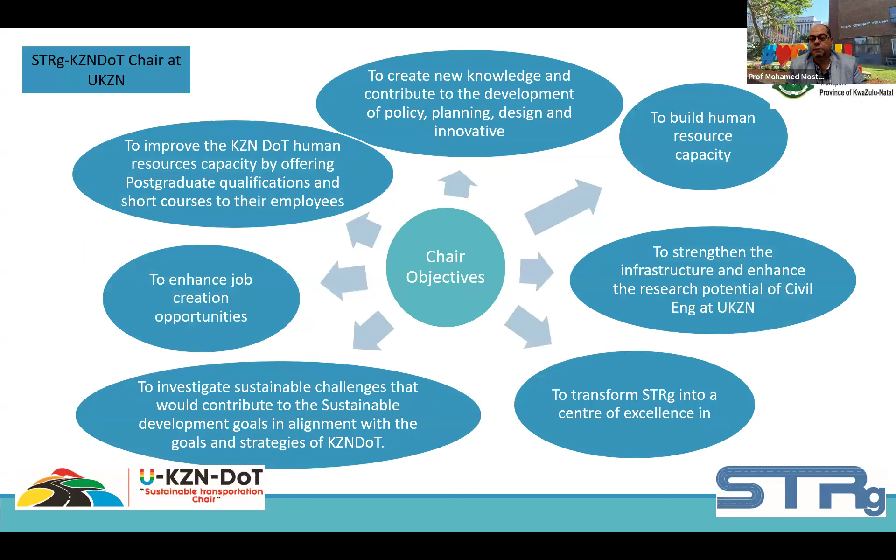I'll quickly answer the question - why are we interested in smart and sustainability at the same time - before presenting our speakers. A warm welcome again from myself as STRg group leader and Chair in Sustainable Transportation at UKZN. Our chair has many objectives, part of which is to share knowledge. Our activity today is to share knowledge with you, knowledge not particularly developed by our research group, but as you will see, developed by scholars around the world. We will all benefit from this, which will help build human resource capacity, especially in the KZN area. Our group is interested in many areas of sustainable transportation research, especially climate change, gravel roads, sustainable road materials, smart transportation, road safety, and so on. We are running research related to most of what you will hear today, which is one reason for sharing this webinar - it's also for us to gain more knowledge which we can integrate into our research portfolio.

For 2024, our research chair is focusing on 4 different projects. The first is improvement of gravel roads. The second is advancing resilient transportation for climate change mitigation. Third is maintenance and pavement management systems. And the last one is public transportation. However, we revisit these areas on an annual basis, and based on that, we also offer opportunities for bursaries and postdoc research.

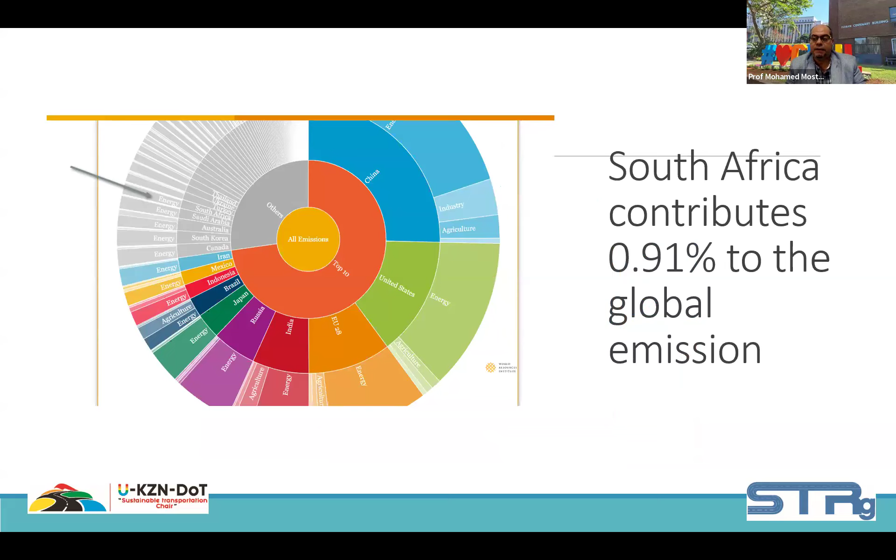So why smart and why sustainable? The sustainability development goals are very important for all of us, and from our transportation area, we can think of goal number 9 and number 11 as our targets to achieve. There is a huge interest in sustainability, and we are not excluded from this interest. South Africa produces around 1% of global emissions, and considering the size of the country, this is a significant amount. Our transport sector used about 50% of the energy in the country as of 2021. I can only assume this figure went up significantly after the developments happening in the N2 and N3 in the region recently, so we are producing a lot of emissions and contributing to climate change, not only in the country but globally.

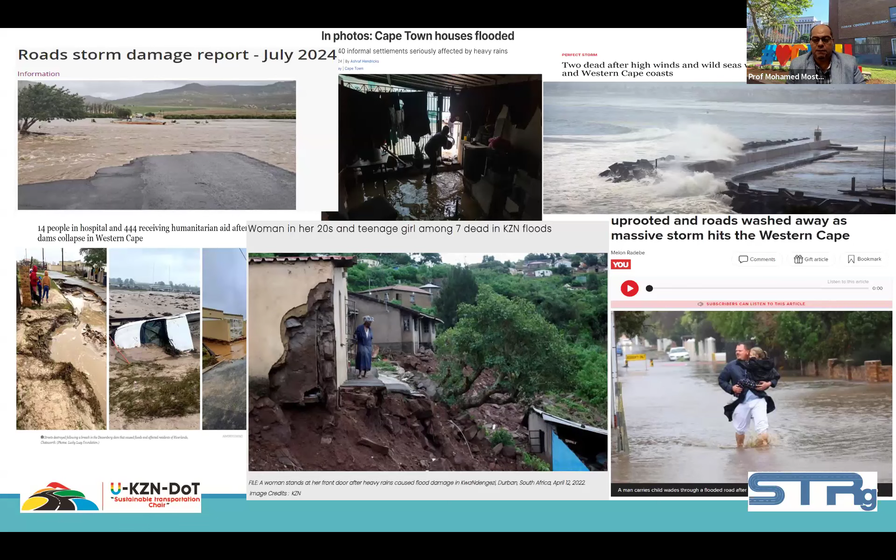Over the last few years in South Africa, in the Western Cape and in Durban, there has been a lot of floods and drought at the same time in different areas. Climate change became a challenge, and it is a challenge for sustainability. So there is a need to mitigate climate change conditions and look at smart solutions, and sustainable solutions became very important. We need sustainable roads, but we also have less budget, so the solution is to look at smart solutions.

So today we will hear from our guest speakers what is their own understanding of smart, because smart is not just technology. It's about other things which our guests will talk about. And of course, they will have a good link between smart and sustainability in so many areas related to transportation.

Let me stop sharing. So, Prof. Das, can you please share your presentation? Thank you, Mohammed. Can you hear me? Yes. Let me share my screen. Okay, great. Good afternoon, everyone. Thank you, Mohammed. Full screen mode, please. How do I go to full screen? Not in full screen. Is it not the full screen? No, not. Okay, click the full screen button and then go to display settings. Yeah, I went to the full screen button, slideshow. It's showing me this, I just try to pop up and then it goes back to normal view. Okay, now go to display settings at the top. No, display settings, not this one. Next one, this one, yeah. The duplicate, so swap presenter view and slideshow. Yeah, duplicate I think. Okay, yes, you are good to go.

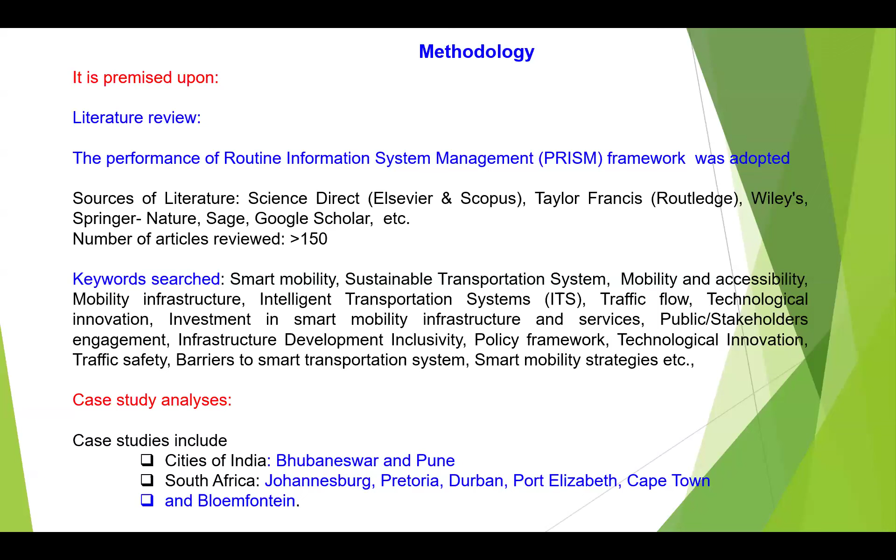So 2 of the Indian cities are, if you look at this, one is on the eastern coast and another is on the western coast. We took these 2 cities because of my acquaintance, and we have already done work there, so it's easy to get some data. That's why we consider these 2 cities, and these two cities are highly growing cities as well as having severe transportation related problems, and they are also in the forefront of making the city smart.

They are 2 of the smart cities in India, recognized smart cities in India, and they have a quite good transportation system or emerging transportation system.

Similarly, on the other hand, in South Africa, we have considered major cities such as Cape Town, Port Elizabeth, then Bloemfontein at the center, Johannesburg and Pretoria in the north, also Durban in the east. So these are the cities we considered as our case studies to understand how smart transportation system is working there.

So to understand smart mobility, we need to understand that it entails using the logistics and smart systems that are associated with transport to improve the traffic flow and mobility of the inhabitants. In other words, it's the accessibility, local or international accessibility enabled by seamless physical transportation using advanced digital technology, including ICT and integrated ITS. So the goal of smart transportation is to reduce pollution, first air and noise pollution, then reduce the traffic congestion and improve people's safety as well as improve travel speed and decrease travel cost.

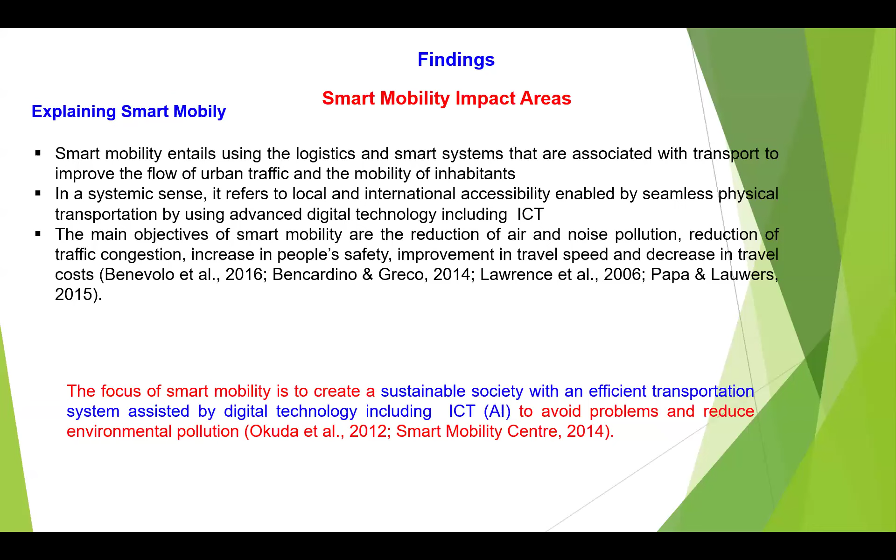So this is the main aim of smart transportation. And in other words, it will create a smart and sustainable city, or contribute to the creation of a smart and sustainable city, by using digital technology, including ICT and artificial intelligence.

So while understanding smart mobility, smart mobility has 6 elements. One is smart infrastructure, smart mobility modes, connectivity and robotics, data and traffic management, personalized services, and logistics. And this leads to efficient transport traffic flow, real-time information and decision-making, affordable transportation, enhanced traffic safety, reduced environmental stress, and inclusivity and equity.

So while there are 5 elements or 5 areas which are highly technical, there is one area, inclusivity and equity, that is also a part of smart mobility, which is the most challenging part in smart transportation.

While evaluating the smart mobility impact areas in case study cities, we have a matrix here of smart mobility impact areas and smart mobility elements, with different cities - Johannesburg and Pretoria have been taken as one region. So there are 5 city regions in South Africa and then 2 cities in India. On the left side, we have our smart mobility impact areas leading to smart mobility elements.

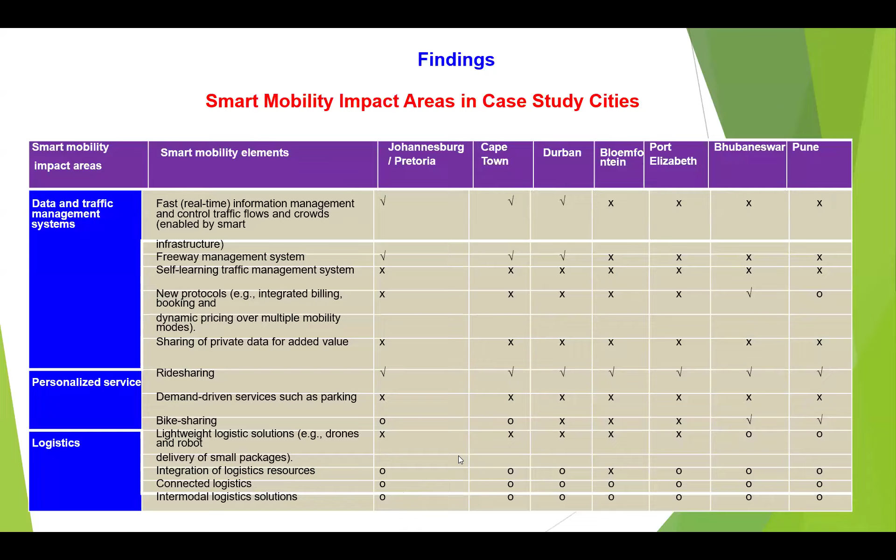So in other words, we find that under smart infrastructure, most of the cities lack smart infrastructure, except smart travel lanes in some of the cities, and energy efficient solutions are not available.

BRT and IRPTN are available in some cities such as Johannesburg, Pretoria, and Cape Town, but present in Durban only to a certain extent. It's not present in Bloemfontein, but in India they are available. Autonomous driving and vehicle-to-vehicle connections are not available in any of these cities. However, GPS is available. So certain elements are available in certain places.

For example, Johannesburg has smart travel lanes, redesigned dedicated areas, BRT and IRPTN, real-time information management, and a freeway management system. This is quite significant and available in South Africa. In Cape Town, similar things are available. In Durban, except BRT or IRPTN, all others are available. But in Bloemfontein you find only ride sharing is available, and so in Port Elizabeth.

In Bhubaneswar and Pune, we have designated, dedicated areas available, BRT is available. New protocols and an integrated billing system are available in Bhubaneswar as part of smart transportation there, but not available in Pune. Ride sharing is available in both cities, and bike sharing is also available in both cities.

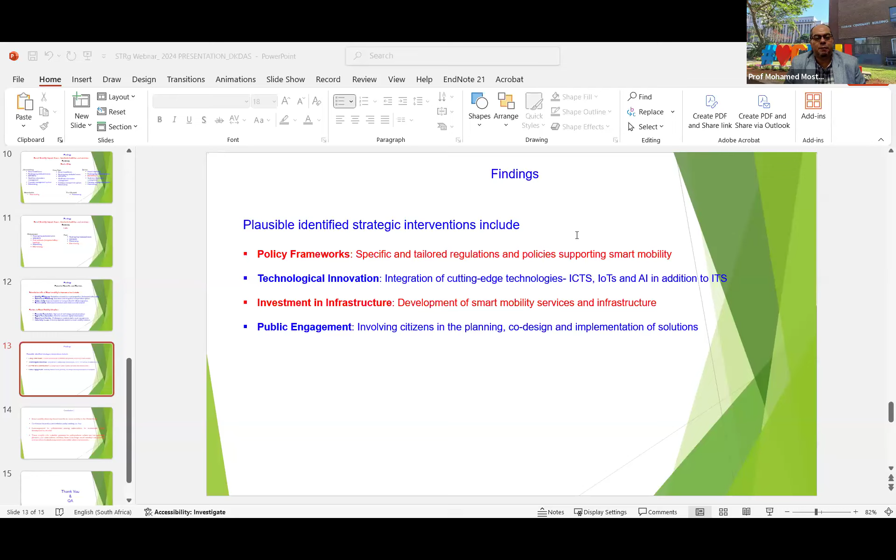No, rail transportation is part of the whole smart transportation process. There is another area in smart transportation called logistics. In logistics, you need to be intermodal, we need intermodal logistic solutions, and rail is part of that intermodal logistic solution. We need to have a balanced freight movement system.

Currently, as Ronald rightly says, the majority of freight moves through road, that's why there is heavy traffic on the roads. So if you move some of the freight traffic to rail, perhaps traffic congestion would be reduced, and that would make the system smarter and more sustainable than not.

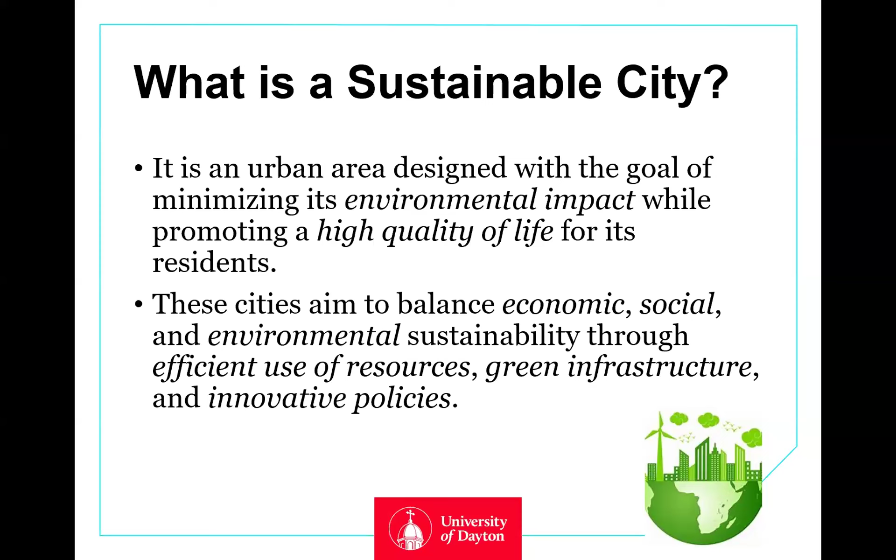So we have 5 key characteristics when we talk about sustainable cities. We look at environmental sustainability, then efficient transportation - that's where smart transportation comes in, and also sustainable transportation.

We are looking at resilient and smart infrastructure - remember, transportation is part of the infrastructure. Also social equity and inclusion, where we make sure everyone in the city, everyone in urban areas, is included. No one is left behind in this society; everyone is involved and everyone is taken care of. And lastly, economic sustainability. So those are the 5 key characteristics of a sustainable city.

So for us, we are more on the transportation side, therefore I'm going to go into that. What are urban mobility innovations? There are several that have been going on over the world. Some are in different stages - some have already started, some are still in development, some are in between.

Urban mobility innovations are essential for creating sustainable cities. It's like you have a human being, a body of the sustainable city, and then you have parts of it, like different parts of the body. Transportation is one part of the system, and this system should be efficient, environmentally friendly, and accessible to all - so talking about equity and inclusion.

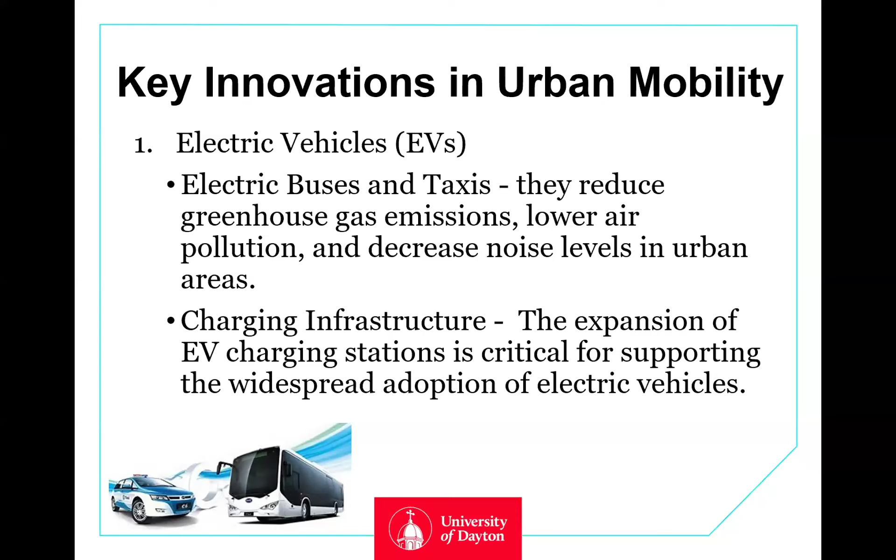Also, we talk about micromobility solutions, which are also electric vehicles. So you have e-scooters and e-bikes, can be shared, electric scooters and bicycles, which offer convenient low-emission transportation options for short trips. That's what we call shared, you can just use them as you need. These services are often integrated with public transit, reducing reliance on cars for last-mile connectivity. We call this the first mile and the last mile.

Also, number 2, we talk about micro-mobility solutions. Now these ones are not electric. These are human-powered bicycles, but sharing bicycles. You don't need to own those bicycles, you can share, use it as you need. So cities are investing in bike sharing systems to encourage cycling as a sustainable and healthy mode of transportation, which in the US are still struggling with. I know Europe is a big thing, they have been in an advanced situation here, but in the US they are still struggling, trying to make this more available and acceptable to most people. So these programs often include docking stations at strategic locations throughout the city, convenient for everyone to access them.

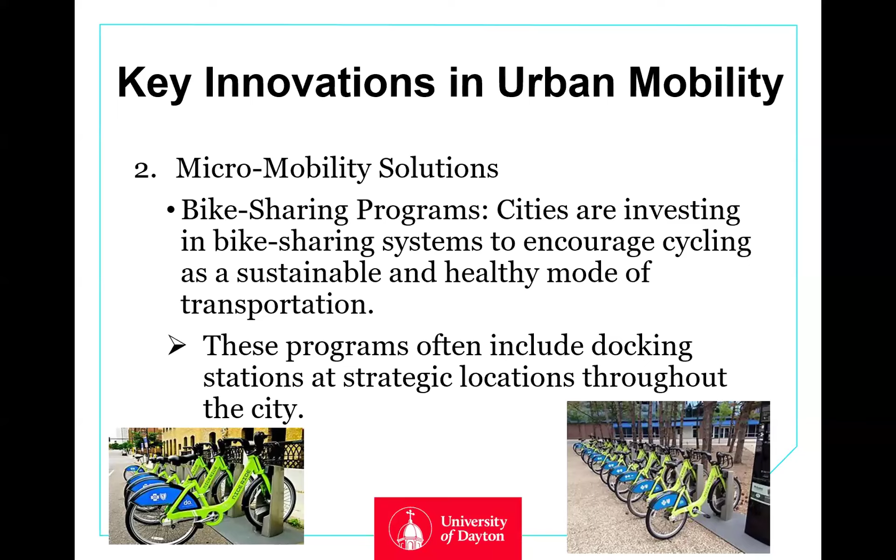The third one is about public transit innovations. Bus rapid transit, BRT. Everyone knows about this. These are systems that offer high capacity, efficient bus services with dedicated lanes, reducing travel times and improving reliability. So we look at this as a way of reducing cars on the roadways and congestion. BRT is a cost-effective alternative to rail systems, particularly in developing cities.

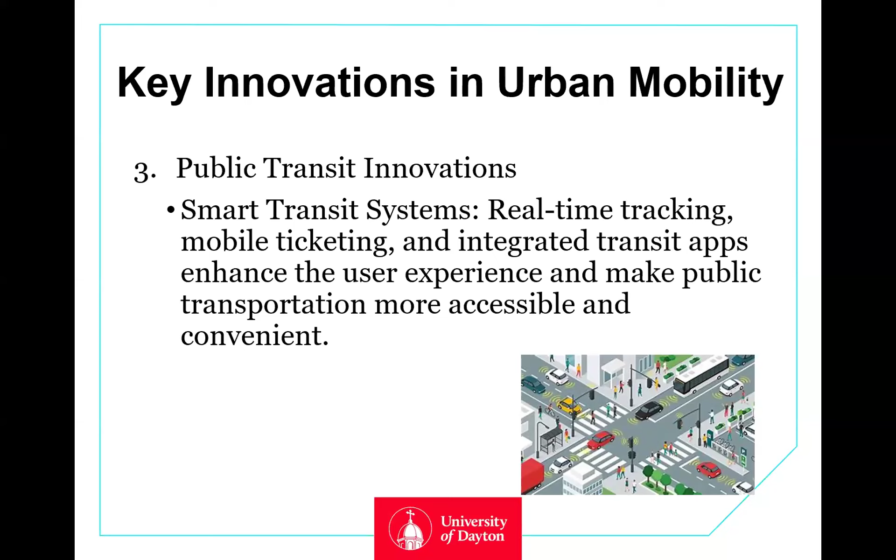Also, we have smart transit systems on the public transit innovation side. They include real-time tracking, mobile ticketing, and integrated transit apps, enhance the user experience makes public transportation more accessible and convenient. So therefore you can easily get a ticket. You don't have to go to the transit station, standing in line trying to get tickets. You can have your ticket in your app, on your phone, so you can just make it easier to go in and out from the bus.

And then you have autonomous vehicles. Here we're not talking about cars and individual cars, we're talking about shared transit autonomous vehicles, which are driving on their own. So we have shared autonomous shuttles. Autonomous shuttles are being tested in many cities, the solution for last mile connectivity around the world. Many countries are interested in this type of vehicle. These electric self-driving vehicles can operate on fixed routes, reducing the need for personal car ownership.

Also, we have AVs in freight and logistics. This is an area which is still not much developed, but testing is going on all over different places. AVs in freight logistics: autonomous delivery vehicles and drones can optimize urban logistics, reducing congestion and emissions associated with goods transport. So you don't really need to have a driver bring your delivery at home. This is probably the future where we're heading.

Also, number 5, mobility as a service, MaaS, which is big in Europe. Also in the US we have this coming in, and probably we use a different terminology, MOD, mobility on demand. They are very much related. These are integrated platforms. MaaS platforms integrate various transportation services, including public transit, ride sharing, bike sharing, and car rentals into a single app. So you have an app on your phone, you can use 4 or 5 different modes on your way. Your app can use the same ticket you buy, connected to your phone, and take a transit bus or a train, or from there take a ride share with the same app, the same ticket, and then take a bike or go in a car rental without really making other transactions on the way, making it much more efficient.

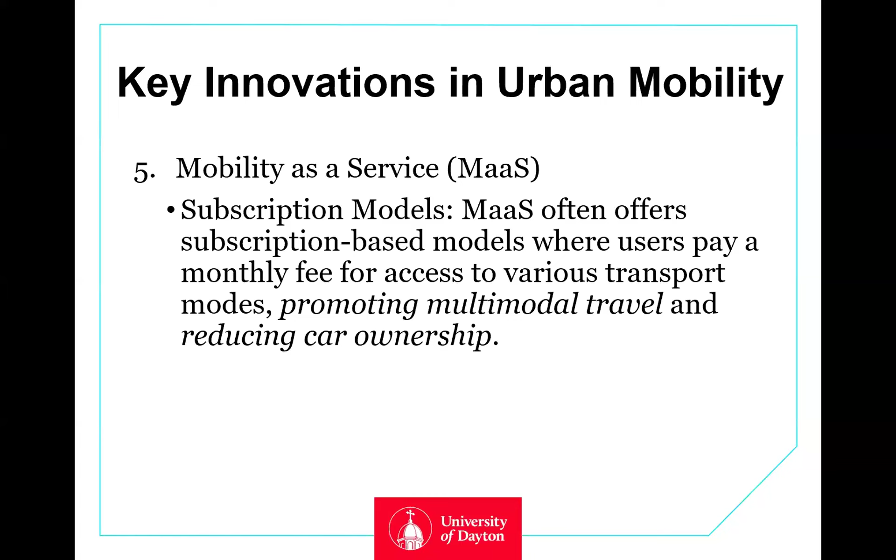Then you have smart traffic management. We have different strategies, for example adaptive traffic signals. These are smart traffic signals that use real-time data to adjust signal timing based on current traffic conditions, reducing congestion and improving traffic flow. The signals can recognize congestion in one leg of the intersection and adjust the green time accordingly, so they're very smart and efficient.

We also have congestion pricing, another strategy whereby pricing for road usage can be implemented, especially during peak hours when roadways are congested. This encourages drivers to use alternative routes or modes of transport, reducing traffic congestion and emissions on the roadway networks.

Also, we have pedestrian-friendly infrastructures, like car-free zones. Many big cities are creating these kinds of zones, pedestrian-only areas especially in the city center downtown, or CBD, to reduce traffic, lower pollution, and promote walking and cycling.

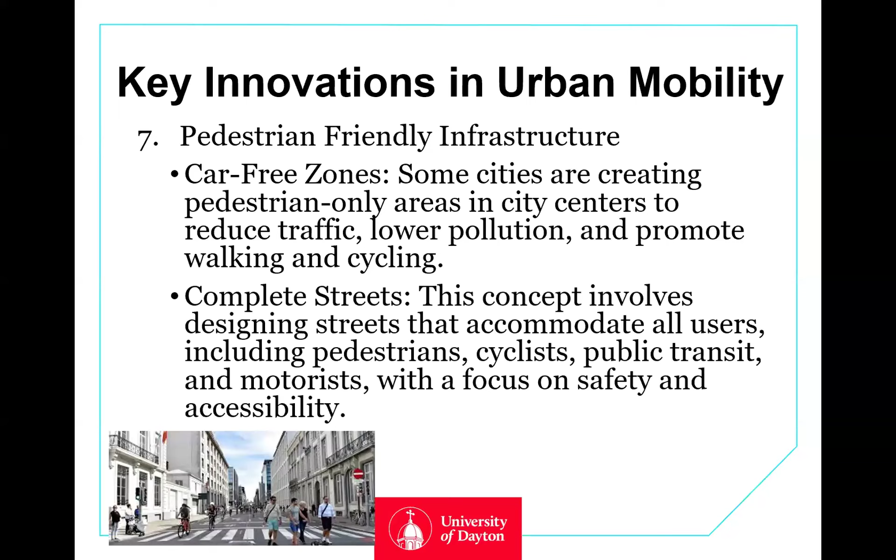Another one is urban air mobility. Probably this is one which is not really in an advanced mode, but a lot of these are being developed and tested in many different areas. There are electric vertical takeoff and landing aircraft, called UAM, urban air mobility. This envisions the use of small electric aircraft for short urban flights, potentially reducing road congestion and providing new transportation options in dense urban environments. These are being tested, and some prototypes are really in use in many different places around the world.

Also, those need ports where they're going to land—we call them vertiports and skyports for those UAMs. These infrastructures have been developed and tested to allow those UAMs to land and take off in urban areas.

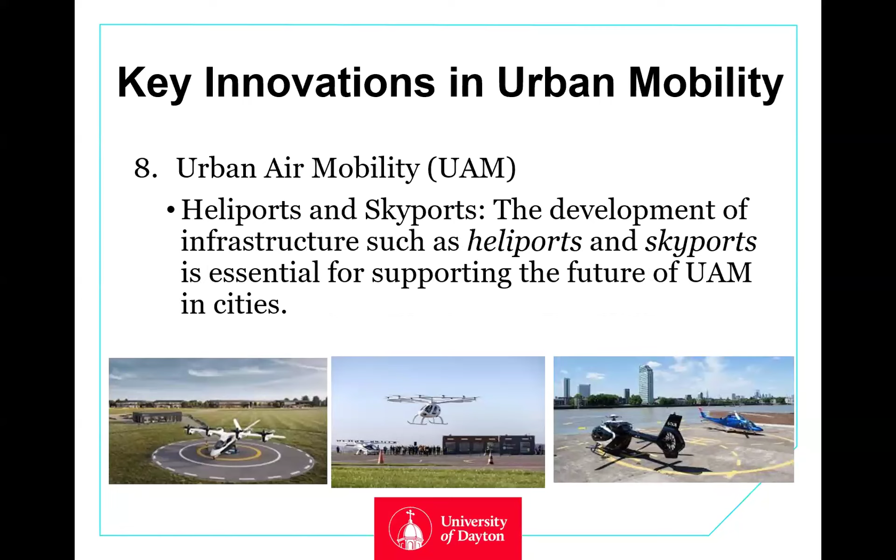Also have sustainable urban planning. Again, sustainability should be planned. So we have transit-oriented development, TOD. TOD involves designing urban spaces that prioritize access to public transportation, reducing the need for cars and encouraging walkable mixed-use communities. In order to have sustainable cities, the usage of cars should be at a minimum. We try as much as possible to encourage people to use other modes of transportation, which in the process increases our ability to be smart and also sustainable at the same time.

We have what we call green mobility corridors. These create green corridors that prioritize walking, cycling, and public transit, not only downtown in the city center, but can be large area corridors outside the city center, which enhance connectivity while preserving green spaces and reducing environmental impacts, making the environment more friendly, good to look at, and enjoyable for walking in a green environment.

Also, data-driven mobility—that's where smart mobility comes into our urban mobility. We use big data and AI to accomplish most of this. The use of big data and artificial intelligence in urban mobility planning helps cities analyze travel patterns, predict demand, and optimize transportation networks for efficiency and sustainability, which go together in urban mobility.

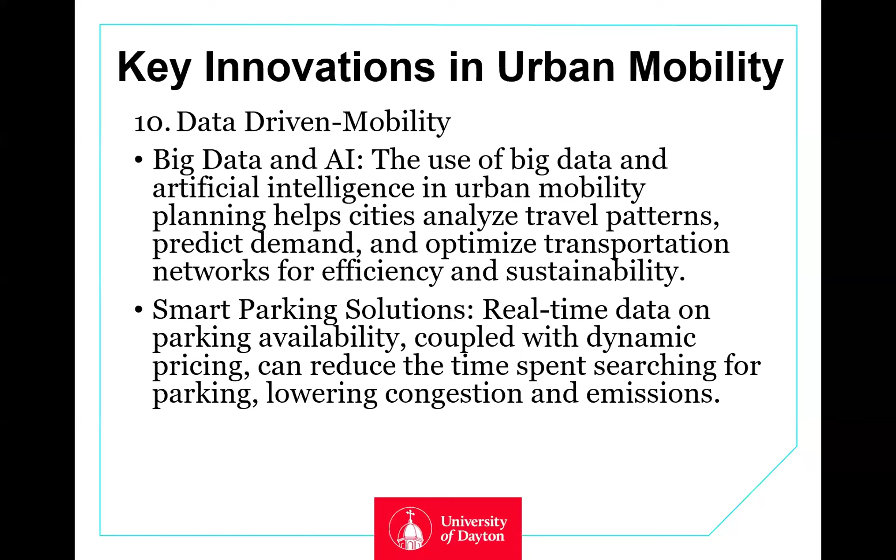Then circular economy in mobility. Vehicle sharing and recycling means that car sharing and bike sharing programs promote the efficient use of resources by reducing the number of vehicles needed, because you don't need to have your own car. Therefore, one car can be shared by different people since their needs may be at different times. You know where the available car is and you go use it right away. Additionally, recycling programs for old vehicles and bicycles contribute to a circular economy.

Also, second life batteries: batteries from electric vehicles can be repurposed for energy storage in buildings or grid applications, extending their useful life and reducing wastage. So recycling is something highly recommended for sustainable cities.

So we have seen some of these different innovations going on all over the world currently. Let's look at a few benefits of urban mobility innovations in summary form.

Reduced environmental impact - we said at the beginning that's one of the main objectives of sustainable cities. By promoting low emission and zero emission transportation options, these innovations help cities reduce their carbon footprint and combat climate change. We know the issues and impacts of climate change, and Professor Mustafa talked about that in the opening talk.

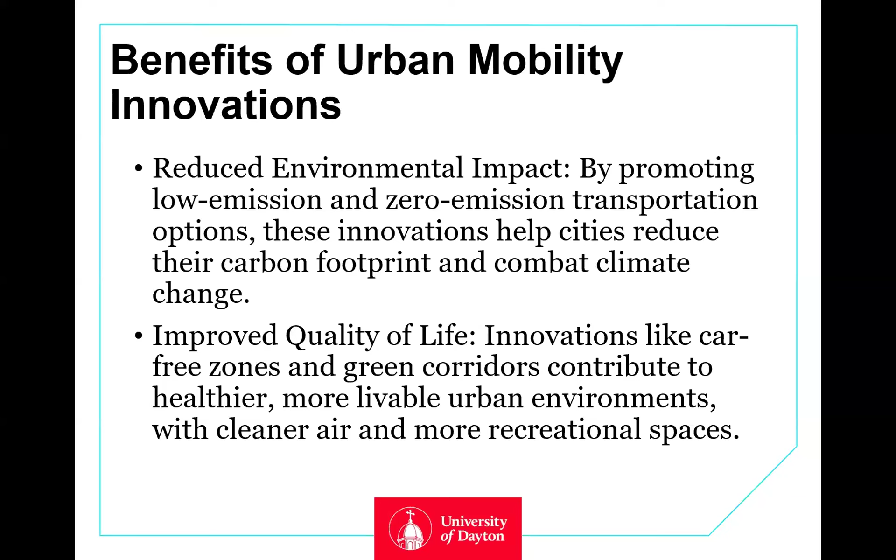Reduced environmental impact - by promoting low emission and zero emission transportation options, these innovations help cities reduce their carbon footprint and combat climate change. I'm sorry, that slide was replicated twice. I apologize for that. Okay, enhanced accessibility.

Innovations in public transit like MaaS - mobility as a service, or MOD - mobility on demand, and micromobility make transportation more accessible, reducing inequalities and improving mobility for all city residents. That's when you talk about inclusive mobility - making all people in the city, the residents, have transportation options. Equitable and inclusive transportation solutions.

Economic efficiency: efficient transportation systems will reduce congestion and travel times, leading to economic benefits such as increased productivity and lower transportation costs. You will see in many big cities, especially in developing countries, how much time people spend on the roadway going to work because of congestion, and that is wasted time and reduced productivity.

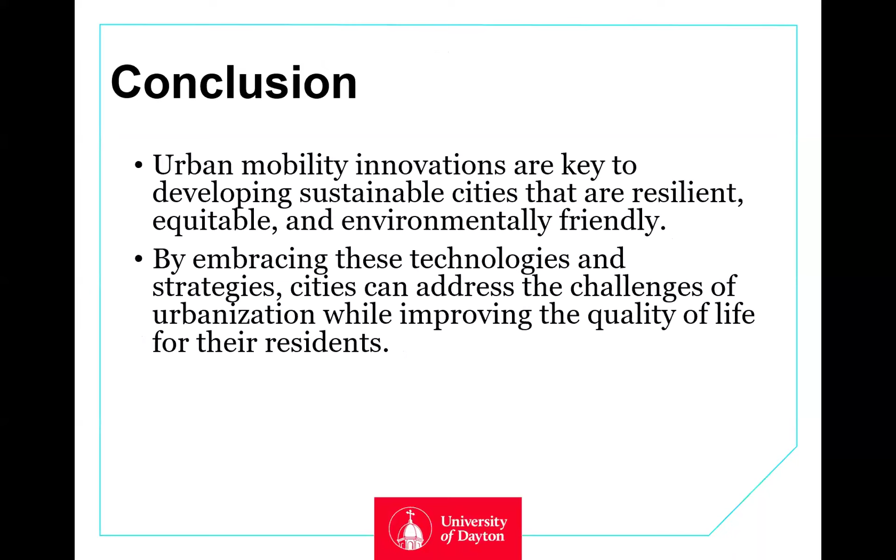On concluding remarks, I have maybe three points to conclude here. Urban mobility innovations are key to developing sustainable cities that are resilient, equitable, and environmentally friendly. By embracing these technologies and strategies, cities can address the challenges of urbanization while improving the quality of life for their residents. Lastly, as technology continues to evolve, the integration of these innovations will be critical to achieving sustainable urban mobility. Thank you, that's the end of my presentation.

Thank you so much, Leo, for this wonderful presentation. I think you proved a very good point when you talked about sustainability, and Philip talked about smart. From your presentation, we can see very clearly that there is no border between the two - they are very much overlapping. We can acknowledge that they are not the same, but we can't really ignore that they are significantly overlapping all the time. I see that we have one question from Lucky.

He says that in South Africa, we currently struggle with most basic services like electricity and water supply. So what are the possibilities of having sustainable cities with smart mobility in the immediate future? I know you have been in the UK for a long time, but I think also your background from Tanzania can help in the answer.

The issue here is that sustainable and smart transportation, as I mentioned at the beginning, is like a human body with many parts. You cannot be a whole human being without your arms, hands, and stomach. So transportation, smart transportation, is part of it. We also expect to talk about smart infrastructure there, water resources, water supply, and other things like electricity should be part of that. So we are here talking about just one component of the sustainable city, or one component of the smart city, which is transportation. Very important, but not sufficient.

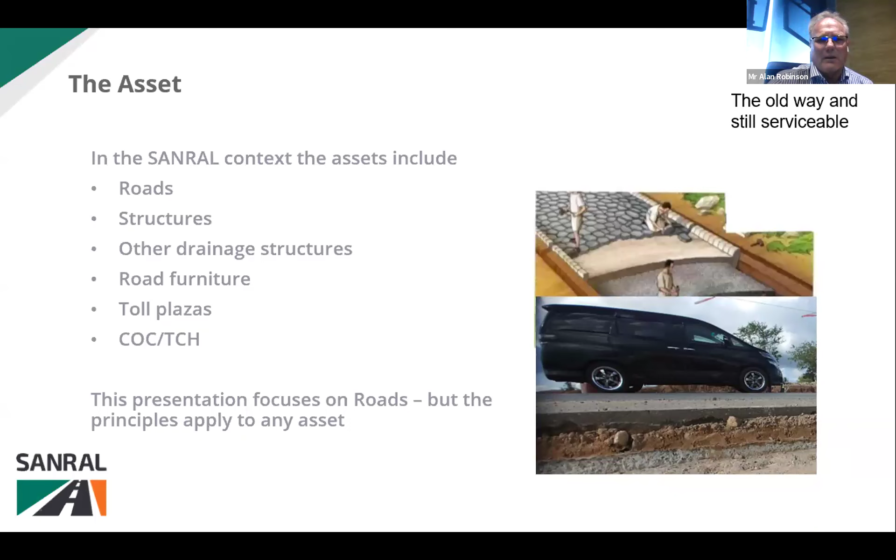The old way of doing roads is that we used to build these things, and thousands of years later they're still there. Today we don't do it that way anymore - we don't build to last because of cost. So cost becomes a very integral part of your asset management.

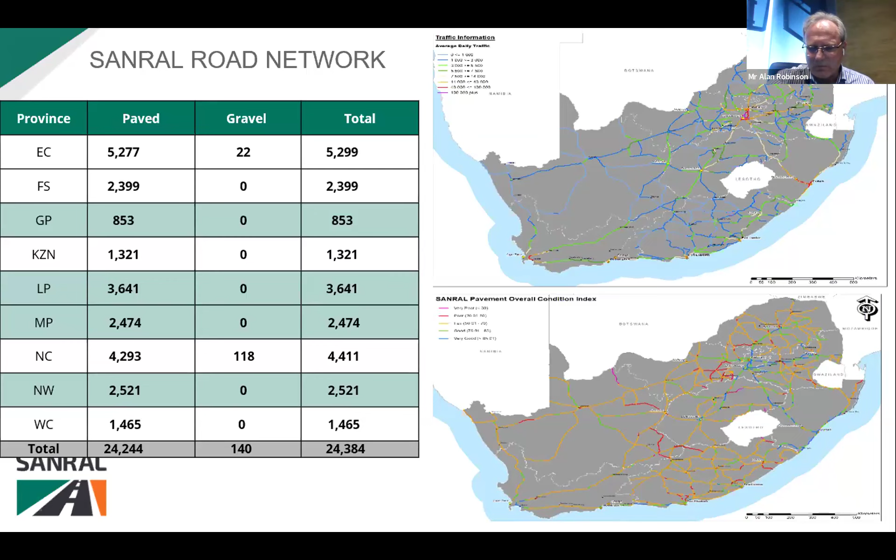Just to give you some idea of the SANRAL road network, we currently are sitting around 24,500 kilometers of roads. We even have a few gravel roads nowadays, and the reason for that is we look at the whole network, and even if there's a road that would make a lot of sense as a good connector, we take it on even though it's gravel, but we will pave it in a short period of time.

So that's just where we are in terms of the growth of the network in SANRAL. When they started, we were at about 7,000 kilometers of routes. When I joined, we were about 22,000. In 2022-23, we got another 330 from the Western Cape, and in 2024 we got some more. Our mandate at the end of the day will be going up to about 35,000 kilometers of road, but we're not all there yet. Our asset base is growing considerably.

So that's the asset. Again, these are the transfers we're about to get. Another 5,000 kilometers is about to happen in the short period coming forward.

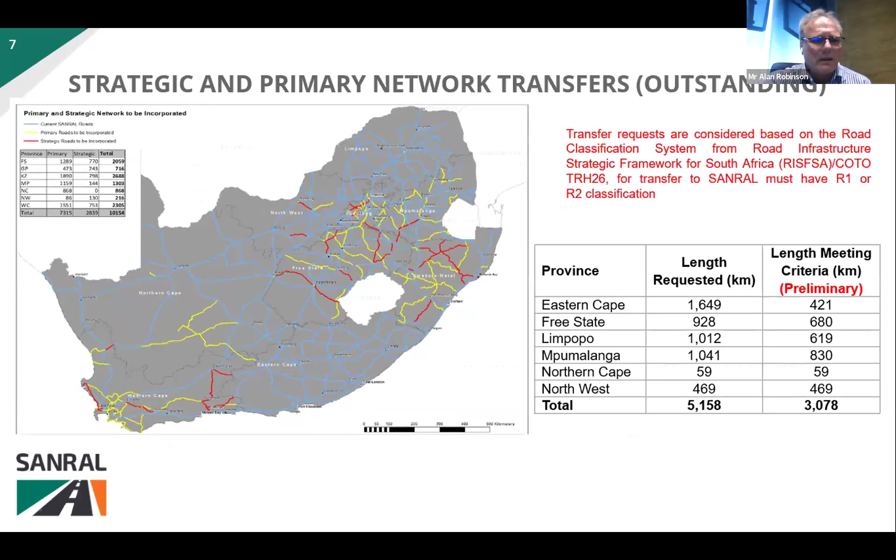All right, so let's go on to smart asset management. The thing is, you've got to know what you have in terms of an asset. One thing is to understand how you're going to look after that asset, or a smart way of looking after it, and quantify the value of that asset. If you don't understand what its value is and how that changes over time, your asset management system, no matter how much technology you throw at it, is not going to produce what you're looking for.

So a smart way of going about it, I'll get back to the basics, and I'll also come back to what's actually happening out there, and where we've really got to be careful when we talk about smart anything at this stage.

So we need to find a means to calculate the asset value. We have asset valuation procedures - I'm not going to go through everything - but it comes with different parts, like the road bed and pavement layers, and the structures. There's various ways of calculating that asset value.

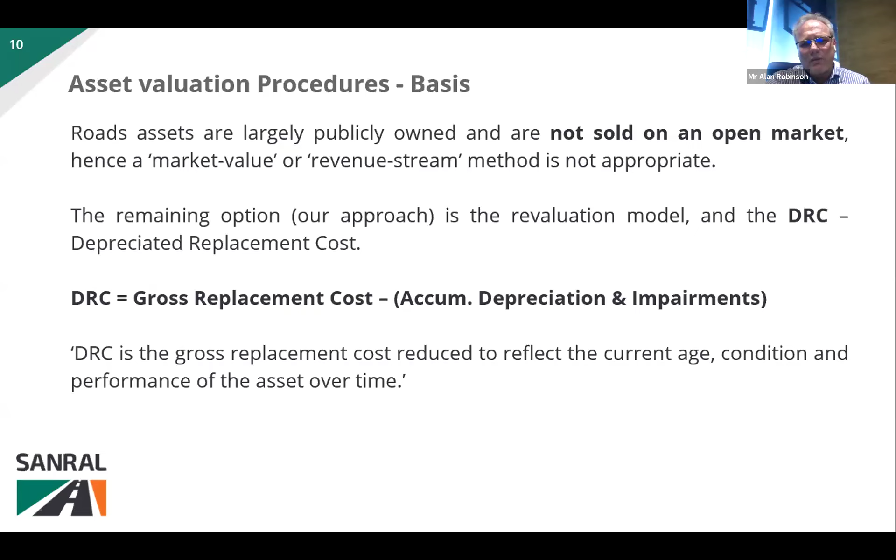We don't sell them, so what value does it have? It's got to have a replacement value. So we've got the gross replacement value, but it doesn't really take in the age, so we look at depreciation, impairment, that type of thing. I'm going to go through this fairly quickly because I'd rather have questions at the end. So we look at this gross replacement cost based on the condition of the road, how big it is, and what it would cost.

And how do we do this? We use technology. We have this thing called the advanced survey vehicle, which at 80 kilometers an hour uses video imagery, GPS, lasers, etc., and actually measures the current condition of the road.

I will come back to that in a bit, but when we talk about technology and systems, this is where I'm very careful in the use of the word 'smart,' because generally everybody uses it, but I find it is overused to try and make what you're selling more marketable.

You do have smart objectives, but that's very good because it's an acronym - I don't have a problem with that. In the beginning, somebody said, technology, is it smart? We have smart technology. I always go back - so what does it mean? It's a high degree of mental ability. That doesn't relate to technology, that relates to people using it. And it doesn't matter what the technology is - if we don't use it properly, nothing's smart.

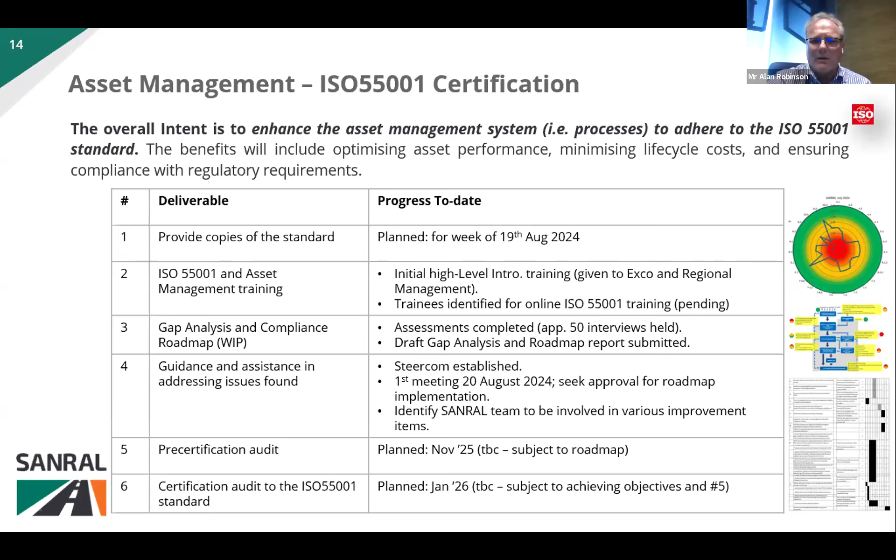I'll go through an example of what we find in practice. At SANRAL, we got the ISO 55001 certification that we're in the process of going through, so we want to make sure that our asset management system is internationally up to standard. We're going through that process - there's a few hiccups here and there, but we're getting it. We're ahead of the game on this one.

So we're getting tons and tons of information, and it's not just a matter of finding it once - we run this survey every couple of years. We try and go over every piece of tarmac once every 2 years, because then you get a time frame of the wear on the asset.

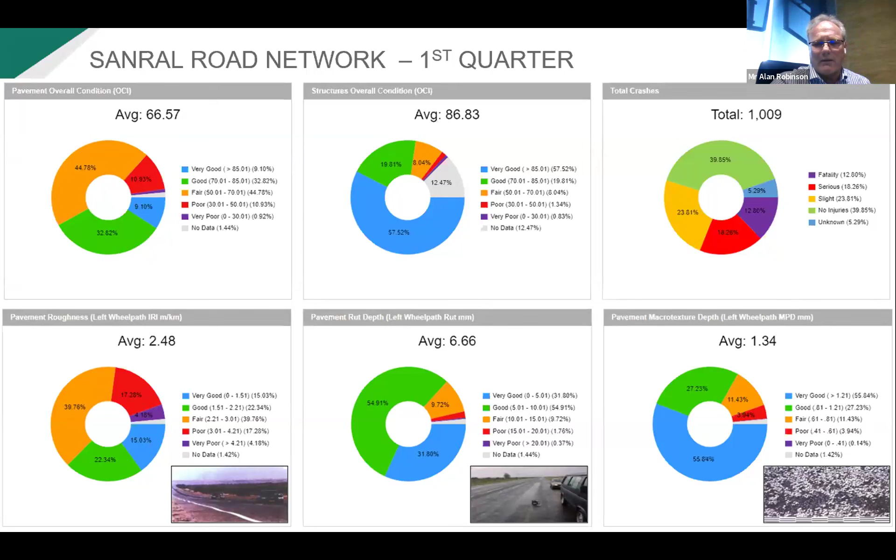The information on the pavement is integrated with traffic information, which we get from nearly 4,000 traffic points around the network, so that we can actually look at the future life of any part of our pavement.

And so my point is, what's smart when it comes to asset management? If you've got all this stuff and you don't use it, it's not. But fortunately, at SANRAL, we have checks and balances that will then send this back for review.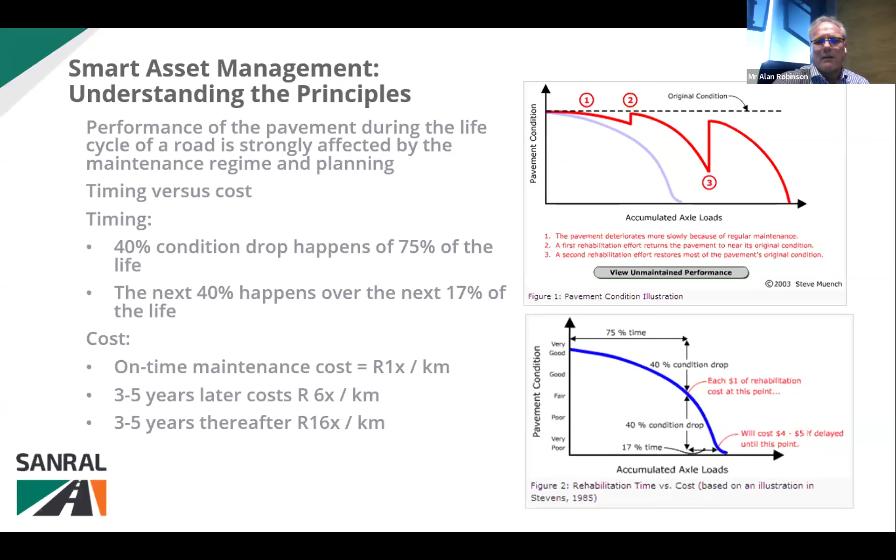But ideally, we maintain what's in good condition. We don't use our first point of spending on the worst roads, it's on the best roads. That's the smart money, because you get the most done with the least amount of money.

Sweating the asset - so it's not just roads. When the survey vehicle isn't out, problems occur, so you end up with potholes. So you just have to look at that.

Then there's infrastructure that we can repurpose. And then there's the road reserve, which is part of our asset - when you think about it, we're the owner of a continuous piece of land between Musina and Cape Town. We own all that land, and that has value. So when you think about smart asset management, you can work on whether there's any way of generating income from it.

Just to go through some of the pothole stuff we've been talking about - we've created apps, all very smart. We can get input from cell phones, from people using apps, from telephone calls. The whole point is a war room that takes that information, collates it, and sends it to the various municipalities to repair it.

So as you say, the systems are actually really good - are they smart? Is it fixing the problem? The technology is all there, but implementation and getting it rolled out to actually fix it - that needs some smart people to make it happen.

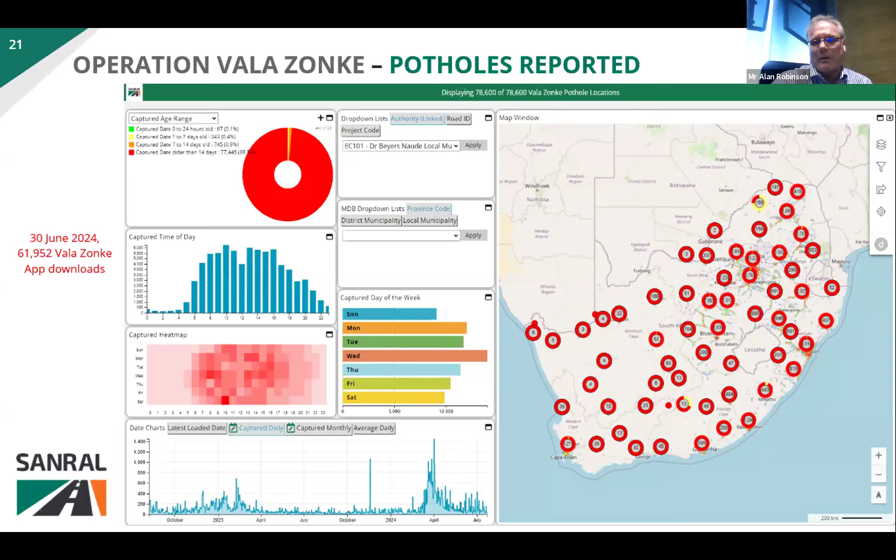Repurposing - I think we all know our Gauteng freeway e-tolling has come to an end. Well, we now have gantries, that's an asset. We have buildings, like central, that's an asset. We've got satellite offices, which are assets. And now it's a case of, alright, we don't have GFIP anymore - what do we do with all of this? So we're looking at ways of repurposing the asset.

So the gantries - we're looking, all the equipment's still on it, so we're still taking pictures of every single car that goes past. We still have ANPR on those gantries. A lot of it, what they're using it for now, is law enforcement. So if there's hijackings or anything like that, a vehicle of interest, we can track it through the system.

The next thing we're working on is to implement speed over distance prosecutions. So those who feel it's lovely, even at night, where you've got four lanes of nobody - yeah, you're being watched.

The building, in there is a thing called the TCH, which is literally a bank that handled all the accounts. So now we're looking at account-based ticketing for public transport, parking. There's lots of other value-added services we're looking at that can have payments channeled through the bank.

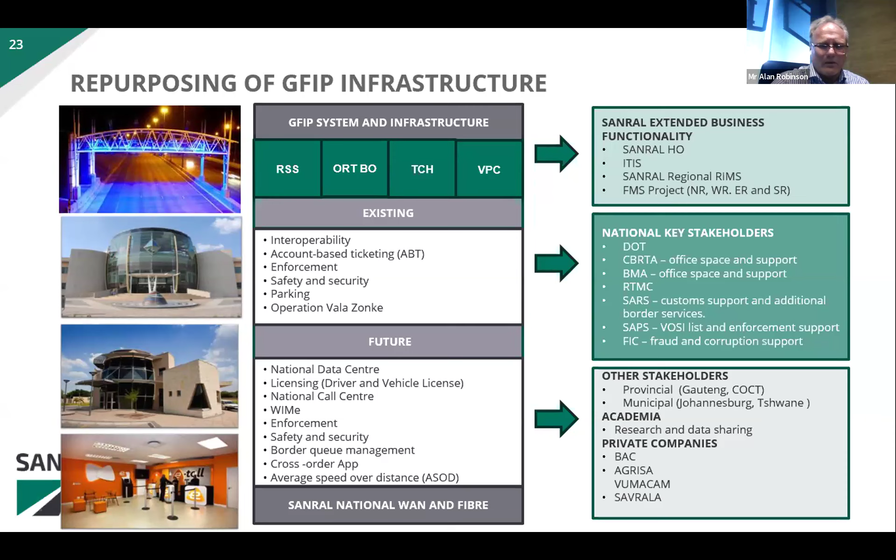It's probably the biggest bank on the continent, because we took on 2.5 million customers on day one, and it handled about 80 million transactions a month - really not a problem. The customer centers, we're looking at using those to issue licenses, driver's licenses, car licenses, and that type of thing, to just make them more useful.

The topic of EVs - what we're looking at is optimal spacing of charging points along the network. And we're coming back to this idea that we own a piece of land that stretches from the top to the bottom of the country. As a public entity, we're not here to make money, but we're here to protect the public.

Often people come along and say we want a spot here, and generally all those people want it on the busy roads. With EVs, it's not just about the busy roads - we've got to make sure it happens all over the place. So we are working on ways in which we can use that influence to make sure we have coverage countrywide.

As I said, my thing is not so much on smart, but questioning the word smart, and hopefully it gives some insight onto, let's call it, more practical application of technology as opposed to hanging on a word. Thank you very much.

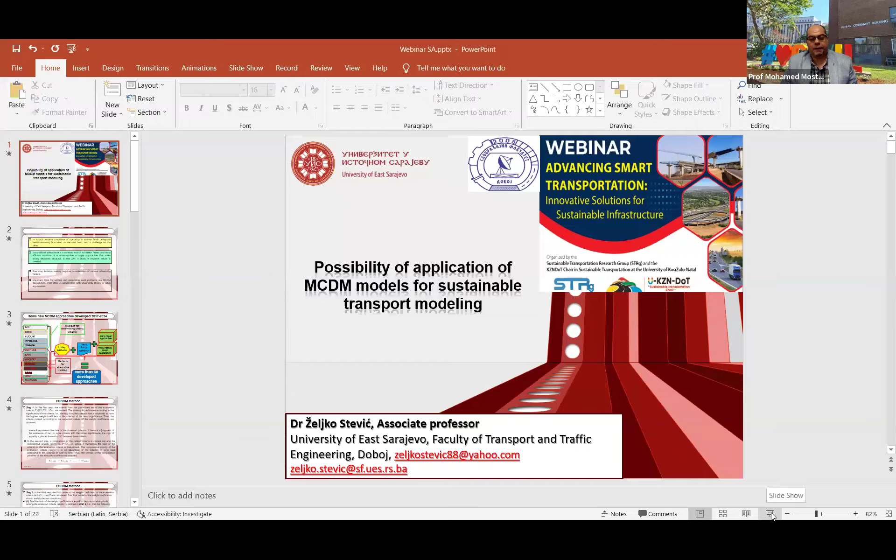Thank you for the invitation to be here today, and it's a pleasure to take part in such a prestigious webinar with all speakers. Professor Mostafa has introduced me, so I will try to be short and concise. I will give a review and a different view in this webinar, and my presentation will be on the possibility of application of multi-criteria decision-making models for sustainable transport modeling. I can say that I'm an expert in operational research, especially in developing and applying MCDM models in transportation, logistics, and similar areas.

In today's modern conditions of operating in various fields, adequate decision making is needed on one hand and is a challenge on the other. In conditions where there is a constant search for better, faster, and more efficient solutions, it is unacceptable to apply an approach that makes wrong decisions, because in that way a chain of negative values is created. So we need adequate input parameters and an adequate team of experts to receive precise and optimal decisions.

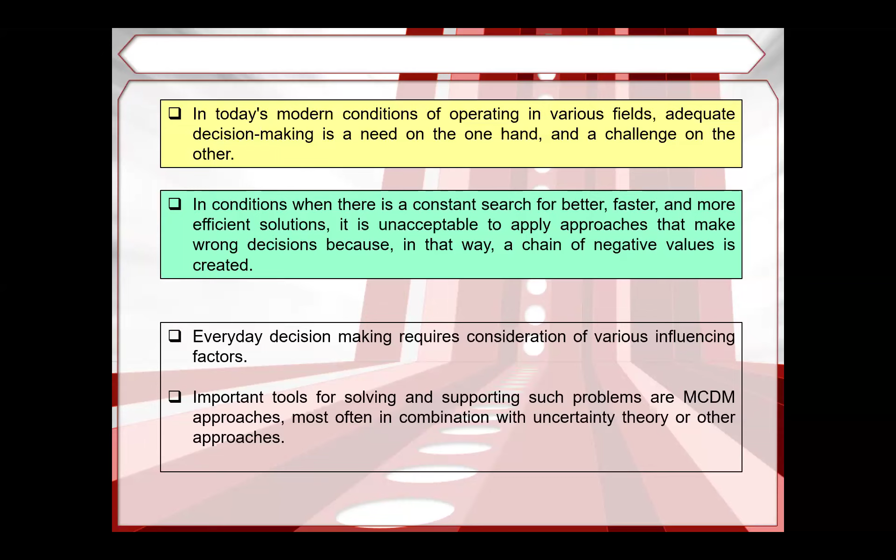Everyday decision-making requires consideration of various influencing factors. Important tools for solving and supporting such problems are MCDM approaches, most often in combination with uncertainty theory or other approaches. On this slide, I will show some developed multi-criteria decision-making models and approaches developed by me and my colleagues around the world in the last 7 years.

We can see that we have methods for determining criteria weights. I have developed some extensions of the AHP method, best-worst method, PIPRECIA or Swara method. Also, I have developed with my two colleagues one crisp method, the full consistency method, for determining criteria weights.

Here we have COPRAS, simple additive weighting method, WASPAS, MABAC, EDAS based on Minkowski space, ARAS range of value, and the MARCOS method. These methods belong to methods for alternative ranking, and my crisp method, MARCOS, was developed 4 years ago, and it is very well cited in all areas of science.

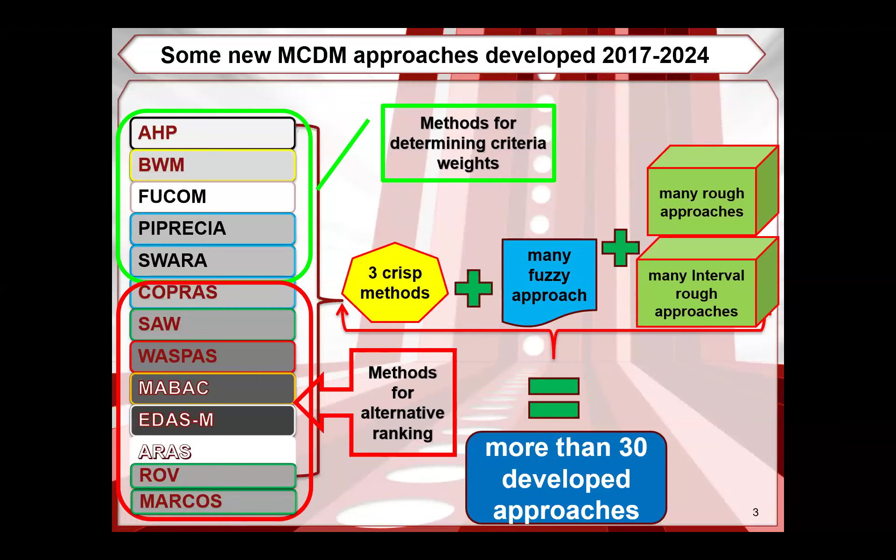So in total, we have 3 crisp methods, many fuzzy approaches, and currently more than 30 developed approaches, which I cannot show all on this slide.

I will present only a few methods, and after that give some examples of their applications related to topics of this webinar. The full consistency method, or acronym FUCOM, consists of 3 simple steps.

In the first step, criteria from a predefined set of evaluations should be ranked. The ranking is performed according to the significance of criteria, starting from the criterion that is expected to have the highest weight coefficient to the criterion of least significance. That means that we need to form an expert group, because it is usual that we have group decision making.

Individual decision making can be said to be in the past. So for each decision, we need to form a group of experts with large experience in the topic of exploration. The expert or decision maker should, in the second step of this method, rank criteria using developed scales. Also important with this method is that decision makers can use any number, for example from 1 to 9, or 1 to 7, or 1 to 5, depending on the scale. But this method also allows decision makers to use decimal places. Of course, in this method, some of the criteria can be of equal importance.

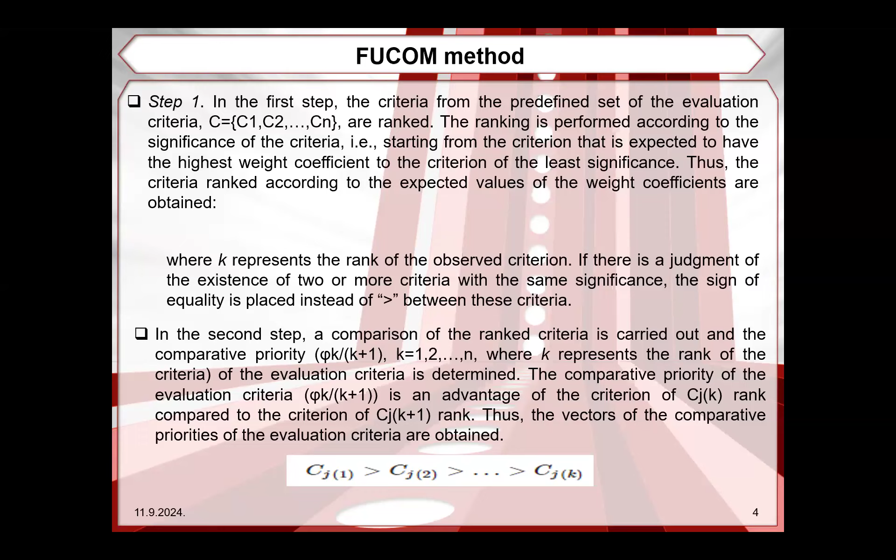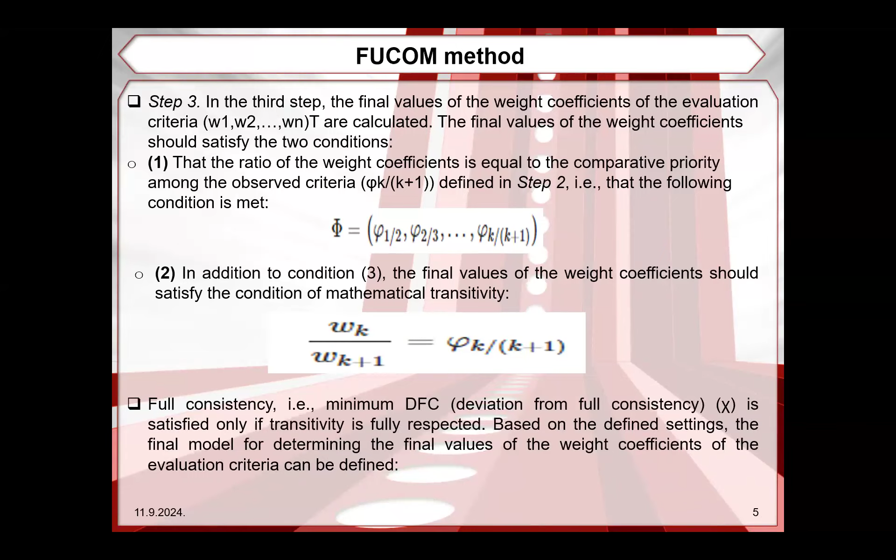In the third step, we should satisfy 2 conditions. The ratio of weight coefficients is equal to the comparative priority among observed criteria defined in the previous step, and final values of weight coefficients should satisfy the condition of mathematical transitivity. The full consistency method has a deviation from full consistency, and in almost all applications of this method, the deviation from full consistency is 0. That means that we have full consistency in decision making.

The final step of this method has been shown in this slide, and I would like to make a short comparison between some popular and previously published methods. Probably we all know the AHP method developed by Thomas Saaty 40 years ago, and the best-worst method developed 9 years ago.

In that table we can see the advantage of the FUCOM method. For example, in the AHP method, if we have 9 criteria, decision makers or experts need to make 36 pairwise comparisons. That is a large number, and often when decision makers use scales in the AHP method, the degree of consistency is more than 10%, but it should be less.

It is important to say that deviation from full consistency in the FUCOM method is 0, while in AHP it is 10%, or 0.1. We can see that the FUCOM method has only n-1 comparisons. What does that mean? If we have 9 criteria, we will have only 8 comparisons. So the process of evaluating each problem is simpler.

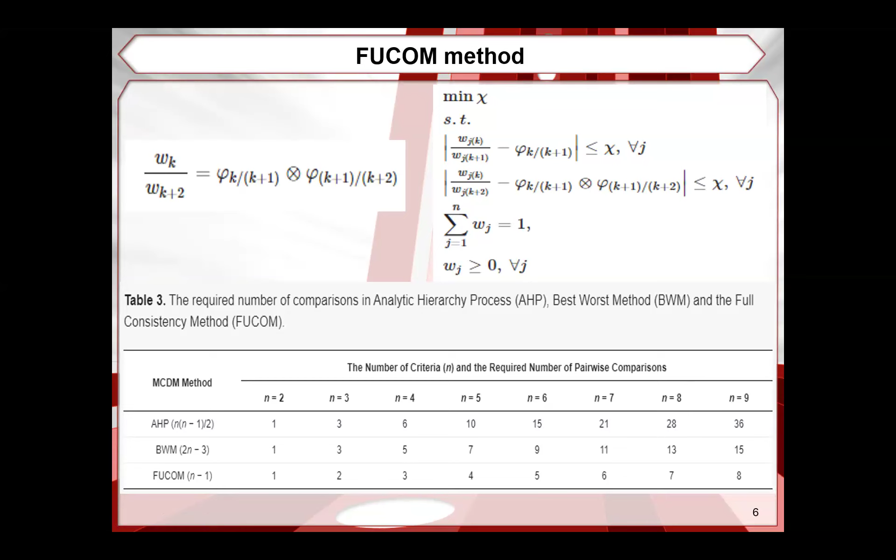The second method is the Marcos method, based on defining a relation between alternatives and reference values, ideal and anti-ideal alternatives. On the basis of defining these relationships, the utility functions of alternatives are determined, and a compromise range is made in relation to the ideal and anti-ideal solutions.

The first step is formation of the initial decision matrix, and step two is formation of the extended initial matrix by defining the ideal and anti-ideal solution. Those solutions depend on the type of criteria. If the criterion belongs to the benefit group, then the ideal solution will have the maximum value. If the criterion belongs to the cost group and preference is minimization, the ideal solution will have the minimum value.

The third step refers to normalization of the extended initial matrix. This step is also related to the group of criteria, depending on the type, cost or benefit.

The next step is determination of the weighted matrix, where we need to multiply previously calculated values with the significance of criteria coefficients, for example calculated with the FUCOM method or another method for criteria determination.

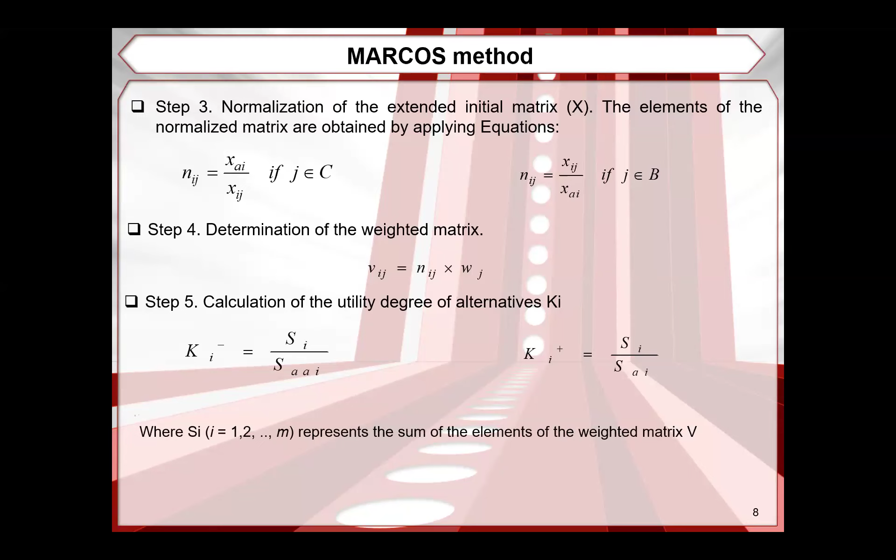The next step is calculation of the utility degree of alternatives, which represents the sum of elements of the weighted matrix.

Step six is determination of the utility functions of alternatives using the following equations, and utility functions in relation to the ideal and anti-ideal solutions are determined by applying the following equations. The last step is ranking alternatives, where the alternative with the highest value is the best option.

As I said at the beginning of this presentation, the whole world very often needs things faster and better. So operational research and multi-criteria decision making often require combination and integration with fuzzy logic theory, fuzzy sets, or rough sets.

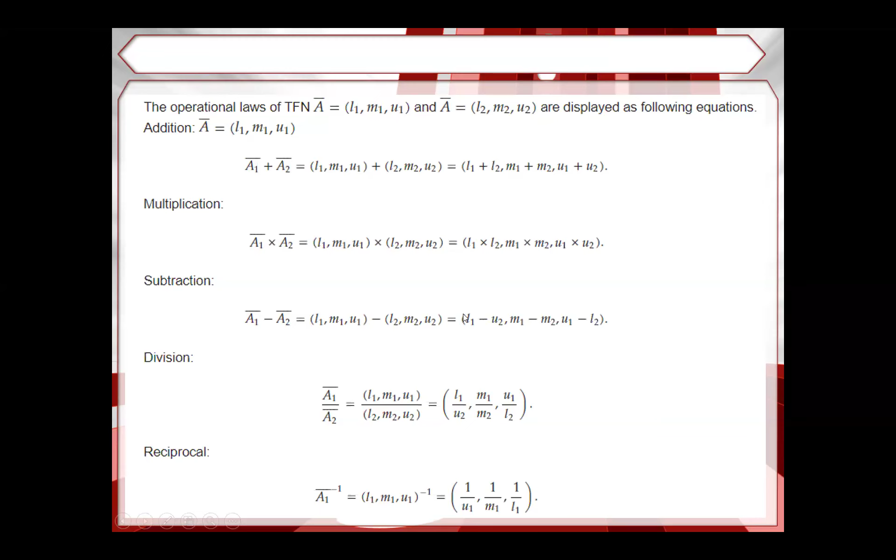So we should use those equations to convert the whole evaluations of experts in group decision making into rough numbers.

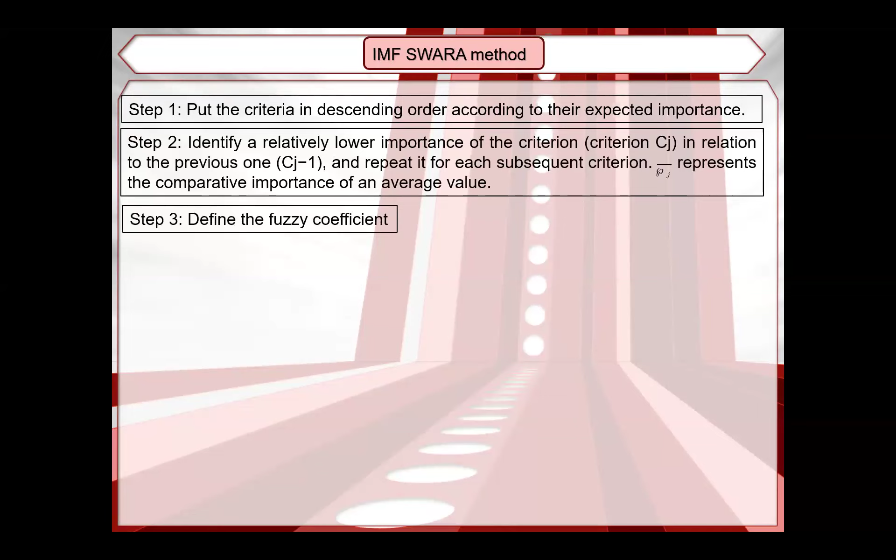The last method is SWARA for determining criteria weights, specifically the improved fuzzy SWARA. The first step is to put the criteria in descending order according to their expected significance or importance. Step two is to identify the relatively lower importance of a criterion in relation to the previous one, and repeat this for each subsequent criterion. Then define the fuzzy coefficient using the following equations.

Then define the obtained weights. What is important to note is that decision makers should use this developed scale for the improved fuzzy SWARA method.

On this slide, I have selected some of my publications related to the topics of this webinar. The first is a publication in Expert Systems with Applications: an integrated decision support model for regional transport infrastructure programs based on performance assessment.

Another is an integrated model for road freight transport firms selecting third-party logistics using spherical fuzzy sets, published in Transportation Research: Part E: Logistics and Transportation Review.

And last, a hybrid fuzzy model for selection of parking lots for vehicles with dangerous goods, published in Engineering Applications of Artificial Intelligence. Those journals are Q1 category in Web of Science.

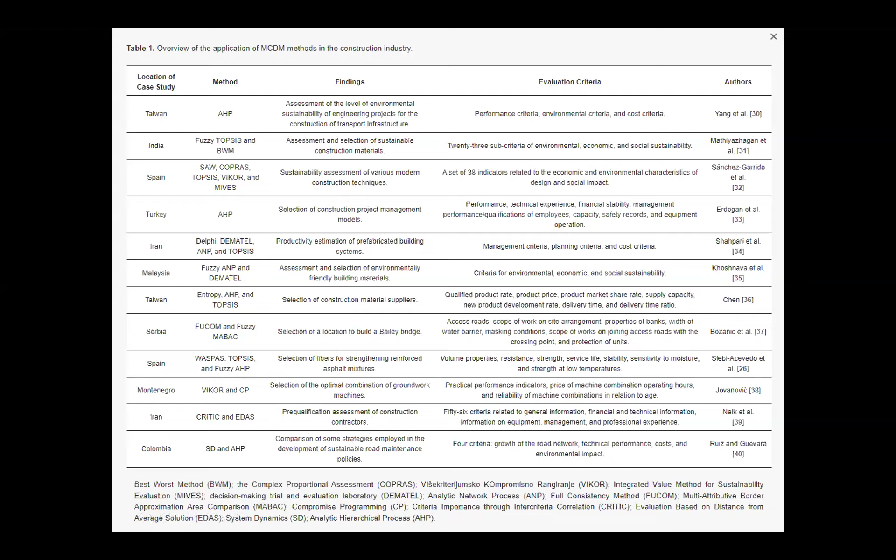For example, multi-criteria decision-making models can be applied for assessing the level of environmental sustainability of engineering projects for construction of transport infrastructure, assessment and selection of sustainable construction materials, sustainable assessment of various construction models and techniques, selection of location to build a bridge, selection of optimal combinations of groundwork machines, comparison of strategies employed in development of sustainable road maintenance policy, and many others.

In this study, we have used a combination of improved fuzzy SWARA methodology and fuzzy MARCOS to evaluate and develop a model for ranking regional transport infrastructure programs based on performance assessment. This study has been conducted in a country with transitions.

Phase 1 is determining criteria weights using improved SWARA methodology. Phase 2 is application of fuzzy MARCOS methodology with each of its steps, and the third stage is sensitivity analysis, verification of the developed model through change of criteria weights, utilization, rank reversal problem, and comparisons with other methods.

For example, in this study the aim is ranking regional transport infrastructure programs based on performance assessment. We had 5 criteria: institutional arrangement, leadership, equality in decision making, available finance, and monitoring and evaluation, and we have 4 alternatives representing the regional programs.

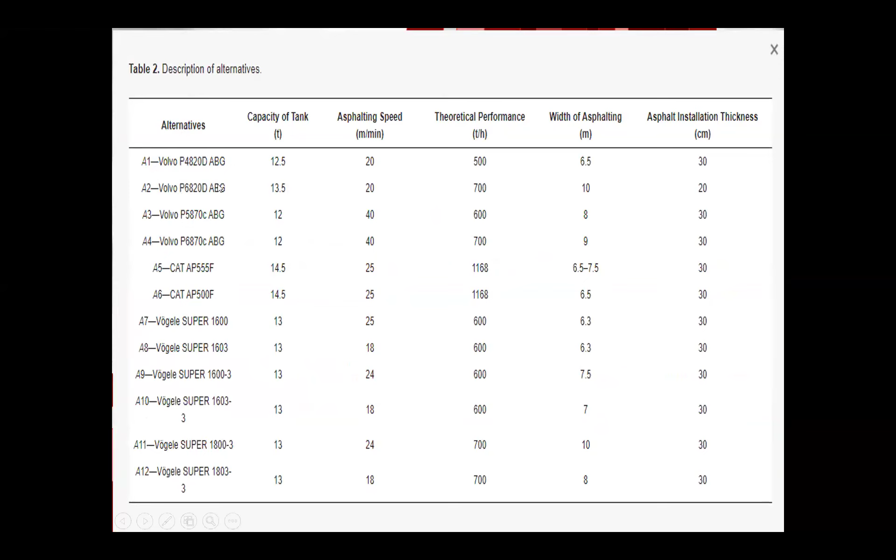The next study has been related to selection of pavers for the first category of roads. We can see on this slide 12 alternatives with some characteristics of them. Also we can see on this slide the criteria for evaluation of those previously shown pavers.

Main criteria include speed, technological group of criteria, and groups related to economic and ecological criteria. We took into account all important criteria and formed a group of experts with at least 10 years experience in the topic. We can see, for example, transport speed, drill speed, tank capacity, dimensions of pavers, weights, gas emissions, and others.

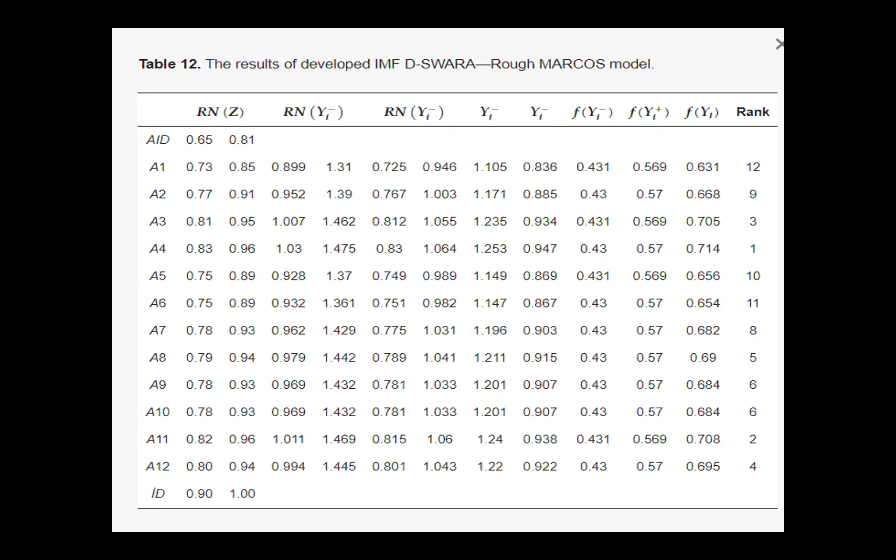This slide shows results of the proposed methodology, and we can see the ranking with final results within the proposed methodology. These models are very important because they can give managers or companies related to transportation fields or transportation planning good proposals or recommendations for decision making.

And the last study is one of the pioneer studies in Europe, and it is related to development of a model for selection of parking lots for vehicles with dangerous goods on the highway network in Serbia.

The third and main stage of this study was development of a novel fuzzy PIPRECIA model, fuzzy MARCOS model, and selection of location for parking vehicles with dangerous goods.

We have used the application of the fuzzy PIPRECIA model for calculations of criteria weights. We must note that we have used the Dombi fuzzy operator because we have group decision making, for averaging of criteria coefficients obtained for each expert.

After this, we have applied a GIS model in order to evaluate scenarios and make the best solutions for parking lots on available places on the highway network. Criteria in this study were distance from inhabited places, protections, environment, distance from watercourses, properties, and infrastructure availability. This picture shows a map of the highway network in Serbia and the placed parking lots for vehicles of dangerous goods.

This table represents the sections of highways with their characteristics and required number of locations. In total, we have 6 road sections, and we have developed 12 different models, because we have 6 road sections and 2 directions, so we have 12 models.

In general, multi-criteria decision-making models are very often used in the field of transportation, sustainability, or any other related field. So my concluding remarks can be that multi-criteria decision-making can be applied for evaluation and selection of any type of vehicles, for example sustainability, urban mobility plans, transportation projects, parcel lockers for delivery and last mile, and traffic safety.

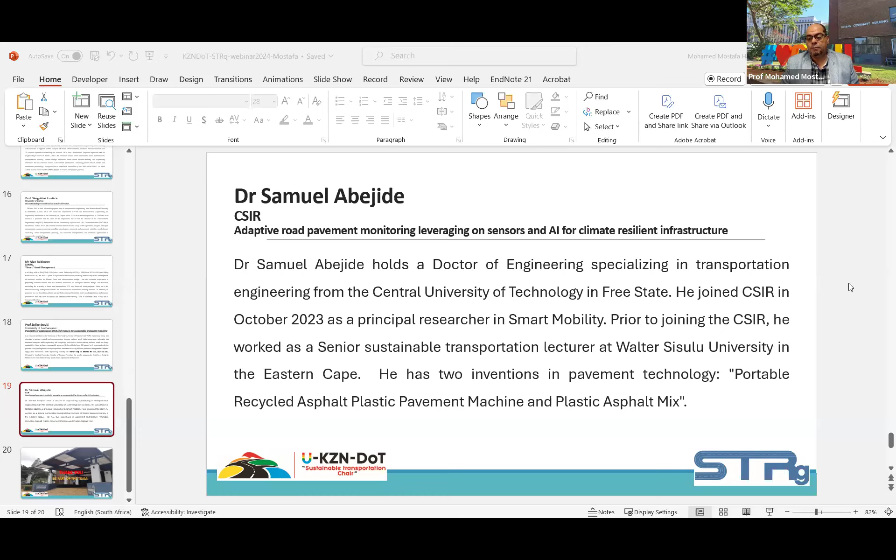Sam? We can't hear you, Sam. Yeah, good afternoon, Prof. Can you hear me now? Please be closer to the microphone. Okay, I'm much closer to the microphone and I'll try to speak out loud. Is it better now? Yeah, that's a little bit lovely, better. Lovely. I'm just quickly going to presentation mode. Can you see my presentation?

Great, go ahead. Lovely. Okay, so very quickly, I will start presenting on something completely much different from smart, sustainable, and multi-criteria decision-making systems. So we're looking now at how do we integrate basically all of these systems into an adaptive solution for the roads.

I saw our presenter from Sanral was speaking about assets. So how sustainable could our assets be facing climate changes? And you saw the pictures about the flood ratings. So how are we able to adapt to global climate changes, looking at our pavements, the infrastructure, and the holistic sum of everything while considering environmental effects?

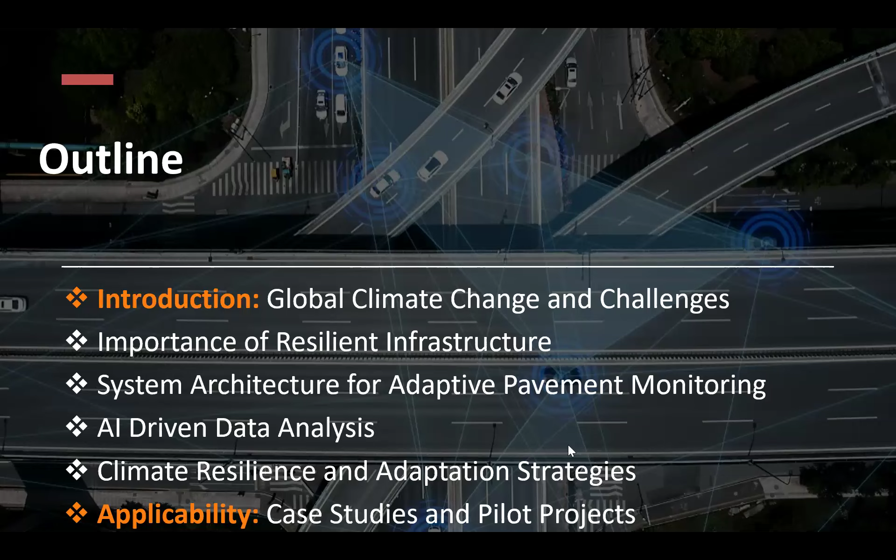Which means we need to start looking at adaptive system architecture for pavement monitoring systems. Of course, we now have to talk about instrumentation, sensors, technology, and also inclusivity with regards to computing, IoTs, machine learning, and artificial intelligence. So we also would consider its adaptation strategies and its applicability with regards to case studies, scenarios, and projects where these systems could be piloted in some way.

So without wasting much time, with the increase in climate variability all across the country globally, our pavements face extremely significant aggravated stresses resulting from unforeseen effects - weather effects, whether it's temperature, moisture, floods like we have seen, or increased traffic. Now we're trying to look at technologies to reduce traffic with the use of UAMs. But even if you look at those things, how efficient would our infrastructure be, even if you create skyports and heliports - how efficient will they be able to cater for environmental changes?

Which means that we will always constantly be faced with heat waves, heavy rainfalls, floods, freezing temperatures, cold snaps, and all of these scenarios together can deteriorate the pavement. Or for example, even if the pavement was perfectly designed, whether it's a flexible pavement or rigid pavement, for 20 or 30 years, there could be an aggravated delamination of that pavement before its expected design life, which means we now have to start looking at different methods, other ways of critically analyzing our pavement design.

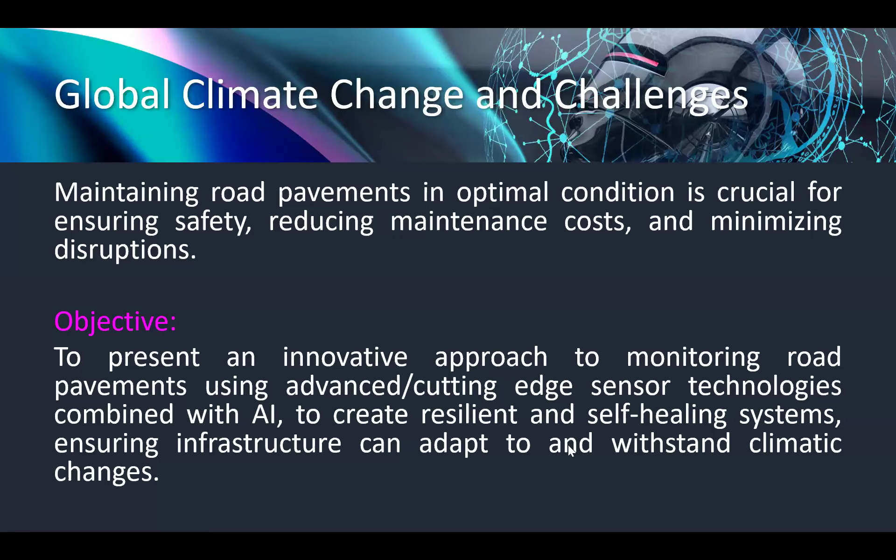And this brings us to the objective, whereby it's to actually find an innovative approach that we are able to use to monitor road pavements using cutting edge sensor technologies combined with artificial intelligence, to create resilient and, if possible, self-healing pavement systems that can ensure infrastructure is able to adapt to climate changes.

I would just like to pose a question quickly: how efficient are our pavement design guides and manuals able to adapt to varying climate changes? We could see Alan was very stressed about the fact that he said we still go back to using TRH4. I mean, it's just a catalog on a page. Is that still efficient? Having done everything smart, we're trying to talk about smart, we're trying to talk about sustainability, yet we'll still go back to the pavement design manuals. Is that still efficient enough?

I'm just going to pause that there for us to ponder on.

This means that aside from those manuals, whether you're using TRH4 empirical methods of design, mechanistic empirical methods of design, or AASHTO 1993, whichever method you're using, it still might not be sufficient to accurately design pavements.

Whether you're looking at rutting failure or cracking failure, yes, those equations - fatigue rutting and fatigue cracking - they are all fine, they are perfect. However, are we able to actually start discretizing in smaller segments the initiation of failure?

This takes us to a different dimension where we start talking about Griffith's relationship with crack tip growth, with unloading stress wave models happening to our pavement that we can't necessarily see. Now, I won't talk much about fracture energy here.

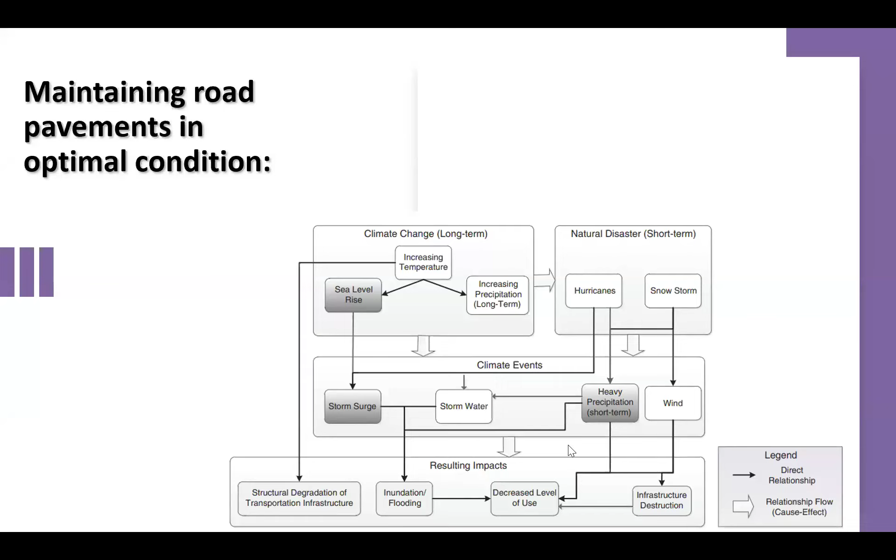So in trying to maintain pavement optimal conditions, this was sourced by Ashraf, we could see various effects here: climate change, natural disaster, storm surge, all of these things. This is just a snippet, but not a wholesome part - there are other effects beyond this whole system that could deteriorate our pavement.

Which means that if we look at this report still by Amir Shayed, we could start looking at various simulation or reasoning techniques that has been developed, looking at your VCI, visual condition assessment, roughness index, pavement condition ratings, pavement condition index, pavement serviceability index, all of these things together.

Are they still able to give us a confidence level in determining the performance and functionality of our pavement within its design life? No matter the type of technology we use, is it still able to give us sufficient information about what we want to gather?

Which means we now have to start going into looking at other variables that are around us that we still couldn't see or that we're ignoring, which has to do with our temperature, climate, temperature gradients, precipitation, rainfall, flooding cases, runoffs, as well as solar radiation.

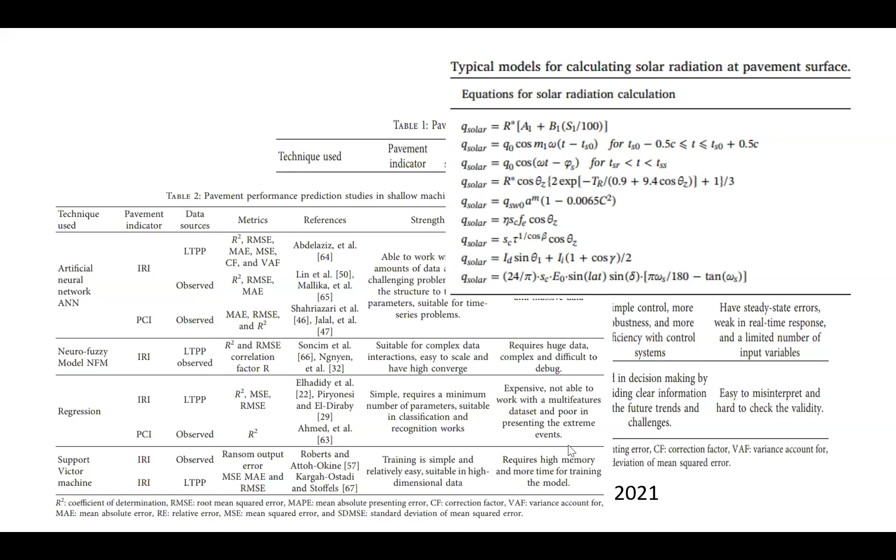We'll be like, wow, we're talking about solar radiation and pavement - how do they connect to each other? Of course, they do connect to each other. You're going to be seeing that in the coming slides.

How is the moisture susceptibility of the pavement as well? The convection index, the latent heat transfer. We're not even talking about traffic loading now - we're just talking about environmental conditions. These are also forms of loading that are affecting the pavement, but we kind of like, no, it's okay.

Well, there are some pavement guides and manuals that talk about wet region, dry region. So we just talk about wet and dry, or semi-wet or semi-dry. But is that enough? Does it give us sufficient data to actually analyze our pavement?

We now need to start looking at the volumetric heat capacity of the pavement. We now start looking at the convection coefficient index of pavement. Of course, there are models that have been designed by a couple of researchers, but we are now saying, okay, if these models have been developed, which particular model is most efficient?

We're looking at wind speed. Yes, we're not into geography, but wind speed does affect the pavement because it guarantees the cooling effect of the pavement when it gets heated up by the sun, or of course, solar radiation effects.

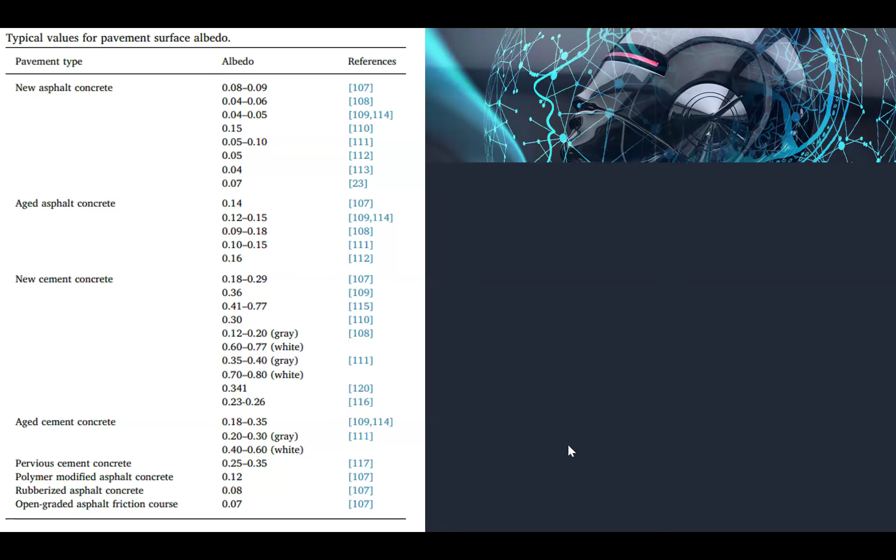What is the emissivity constant of that pavement? Which means, how well is the pavement able to absorb heat or emit heat, and how well is it able to cool itself? That's now what we need to start thinking if we now want to synchronize all of these scenarios together: smart and sustainable analysis.

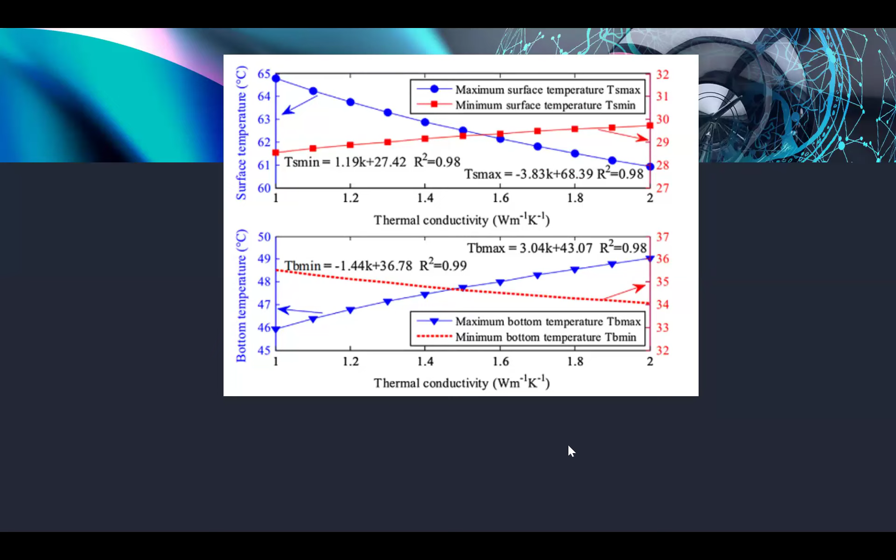We now have to start discretizing, going into the smallest fraction of pavement performance. We look at surface temperature of the pavement, the underlying layer temperature, the moisture absorption, the moisture ingress within the pavement, which gives us an indication, with solar radiation, of the thermal conductivity of that pavement as well.

So we now have to start looking at other variables in our design: thermal conductivity, specific heat capacity of the pavement, not just specific gravity only, and thermal diffusivity of the pavement as well. Whether you're looking at asphalt concrete, plain concrete, or even the subsoil, they will all vary in various fields.

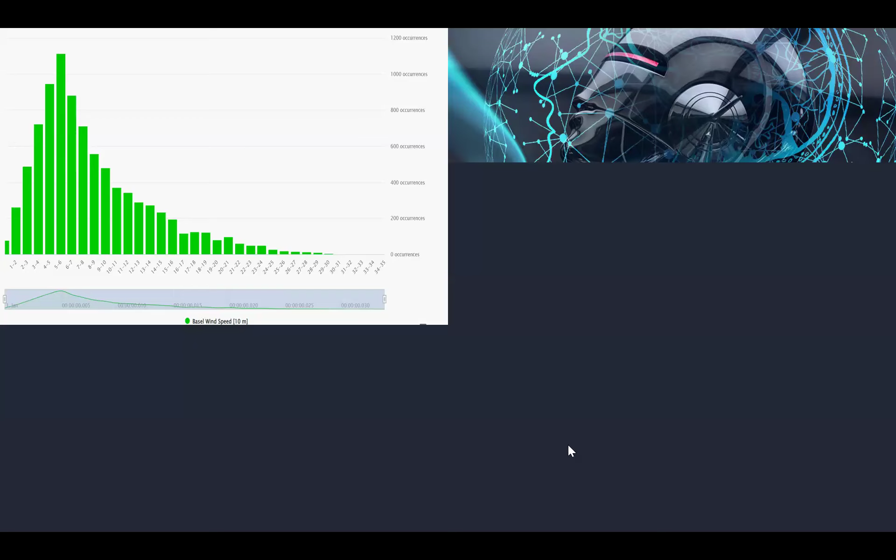I'm just going to pause on all of those for now. Let's come back to our climate, let's come back to our environment. If we start looking at wind speed, you might think, what do I have to do with wind speed? I mean, we are doing pavements here. If we start looking at temperature, atmospheric temperature, air temperature, what's happening here?

How do we now model our pavement with regards to our environmental data, taking actual environmental effects for that particular area? This means we now have to start working hand in hand with weather stations, modeling and forecasting, and comparing what the temperature was from last year, how it differs from this year, what the percentage difference is, and how we can forecast pavement temperature, atmospheric temperature, humidity, or radiation of that particular area now and in future years to come.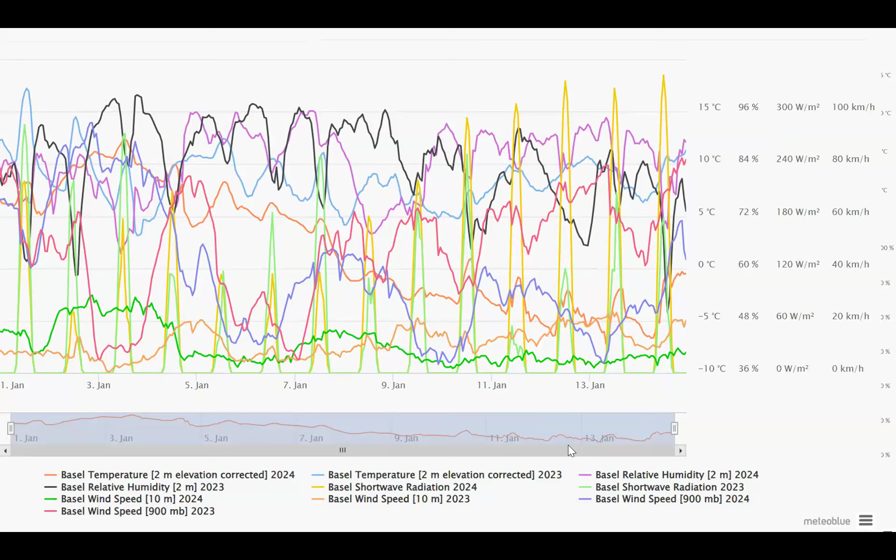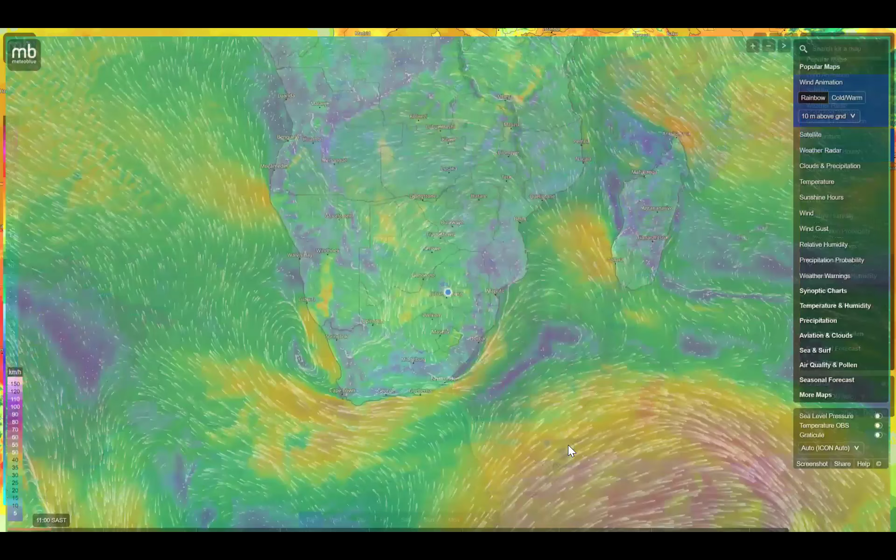So we now need to listen to the pavement. That brings us to where we start instrumenting the pavement and understanding the climate of that area, understanding the region. If we take a wholesome map, we can now start analyzing our map with regards to the weather. You can see the very red places mean it's really hot, and it's going to be temperate. You can start seeing the cooling effects and the way the precipitation will grow.

So if we're looking at the weather in the evening, the weather forecast for next week or next month, how does the weather forecast affect your own daily plan? And how does the weather forecast also affect the performance of the pavement? We now need to start finding alternative ways.

So here is just a model that I developed for Pretoria, where I had the weather forecast for Pretoria, and we tried to use some model equations to check the relationship between the convective heat flux of the pavement and the heat transfer coefficient of the pavement.

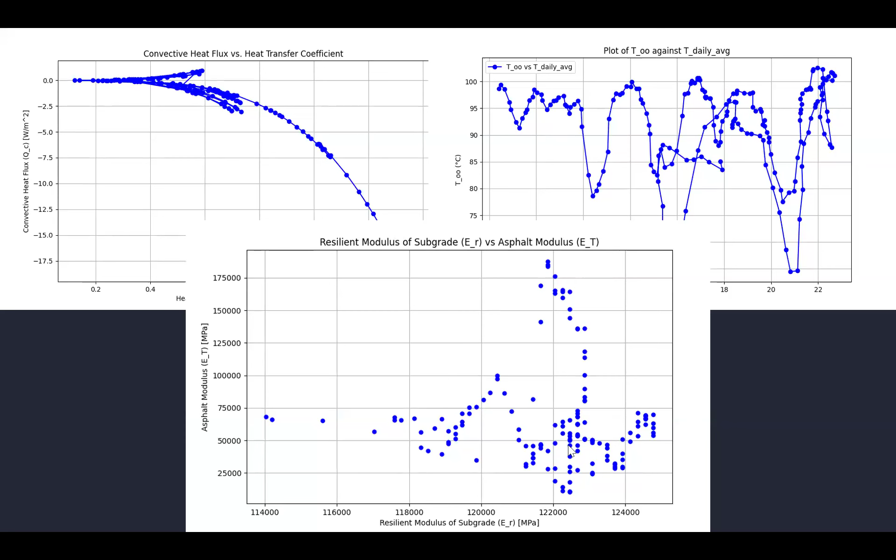Well, this is for Pretoria, so these graphs will definitely vary when you go to other areas, hotter areas across Africa, or even cold countries like Alaska and the polar regions. This will now lead you to determining various other effects with regards to the behavior and strength of the pavement, with respect to asphalt modulus and the resilient modulus of the subgrade, where we now start talking about humidity, moisture ingress, and saturation coefficient of the pavement.

And of course, we now start looking at the relationship between the net heat flux of the pavement versus solar radiation. I'll say, for me, we need to start looking at this.

In as much as we start looking at all of these environmental conditions, we have to apply them to the behavior of the pavement. How will our pavement behave to temperature? How will it behave to snowfall? We already have established knowledge on viscoelastic damage of pavement, but beyond that, what else are we looking at? Does wind speed and wind direction affect the pavement? Of course it does—it affects the cooling effect of the pavement, how fast and how susceptible the pavement is able to cool. Because if the pavement cools quicker, it won't deteriorate faster. So these are various coefficients we have to start looking at.

The weather data definitely will affect pavement temperature fields by influencing the energy exchange at the pavement surface. We now have to start looking at climatic effects. But are we only looking at weather forecast? We now have to look at intrinsic properties, instrumentation of the pavement, and one very key important part is the type of material we are going to use to design those pavements. Are they climate resilient materials?

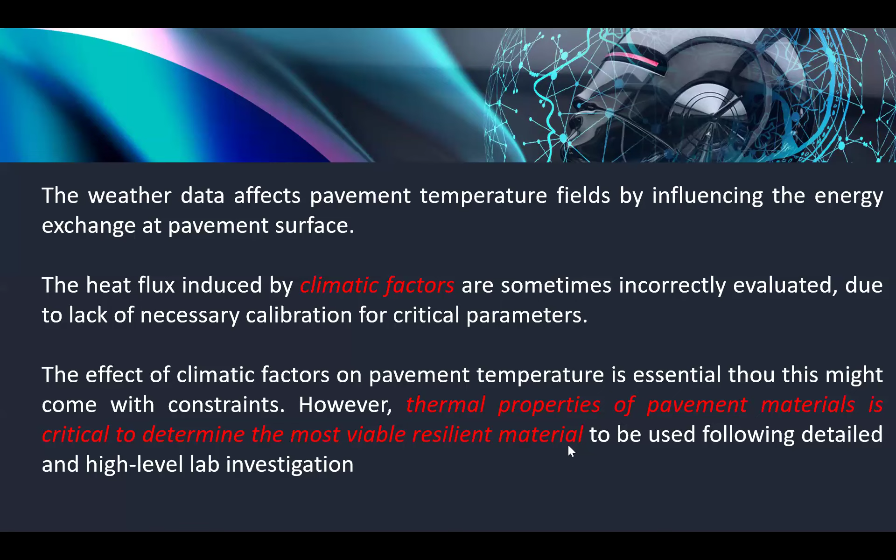That's very critical in our design of pavements, which means the selection of pavement materials for climate resilient infrastructure must consider a range of environmental and durability factors, particularly the interaction between solar radiation and pavement performance. We now start looking at the pavement albedo constant, which is the reflectivity property, and the emissivity property, our ability to radiate heat. Because these two key points play a critical role in influencing pavement surface temperature, thermal stresses, and wholesomely, pavement longevity.

So just a brief definition to understand what's albedo constant. It's just a measure of the surface's ability to reflect solar radiation, which means a higher albedo constant means more reflectivity and less absorption of heat—our pavement won't absorb much heat longer than necessary.

And of course, it will then be a function of the cooling effect and the wind speed—they might have to go hand in hand. Then look at emissivity of the pavement, the efficiency with which a surface would emit thermal radiation, which means higher emissivity values indicate the material can radiate or release heat back into the environment.

Critical—we now start looking at heat flux and thermal stresses, which means we need to pay very close attention to solar effects. We are talking about global warming, climate changes, and all of these things. We need to start looking at adaptive translation of all of these effects into pavement design. Are our design manuals considering all of these effects? Are there provisions within the design guides? Or are we still facing our old-aged—well, some of them not so old—previous design manual guides? They're still efficient, no doubt, but are they able to withstand current climate changes?

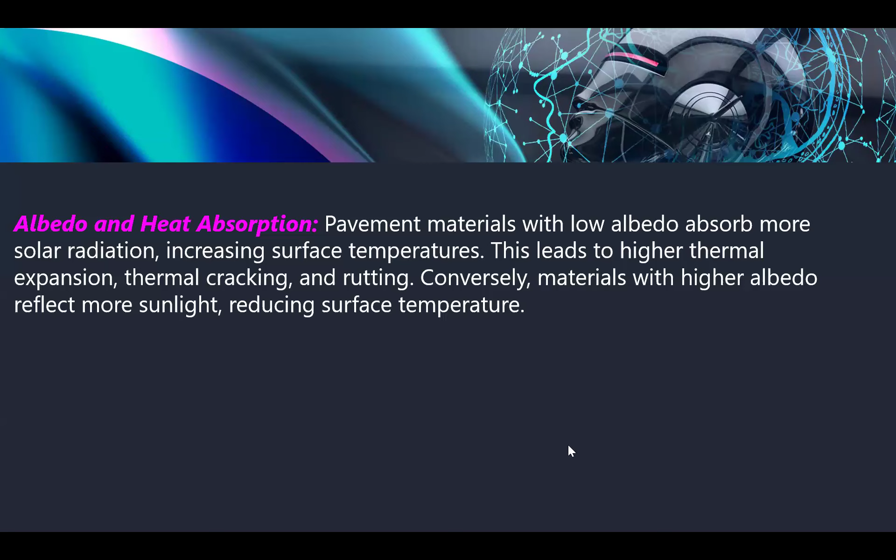So in summary, we can now start looking at the relationship between the albedo constant and heat absorption, and the relationship between emissivity and heat dissipation, which means we need to critically start considering the type of material we use, because it will affect the pavement's performance. We're not trying to say the design methodology shouldn't be reviewed, but how do we start looking at material selections? Because if you choose a material that retains heat longer than necessary, the pavement life would be shortened.

And this speaks about heat dissipation—how will your pavement absorb and reflect heat? Higher wind speeds can effectively lower the pavement surface temperature by enhancing the convective heat flux, which means cooler pavement effects. But if we go to urban areas, are we able to have sufficient wind effects? Because we've got high-rise buildings. How well are our pavements cooling themselves?

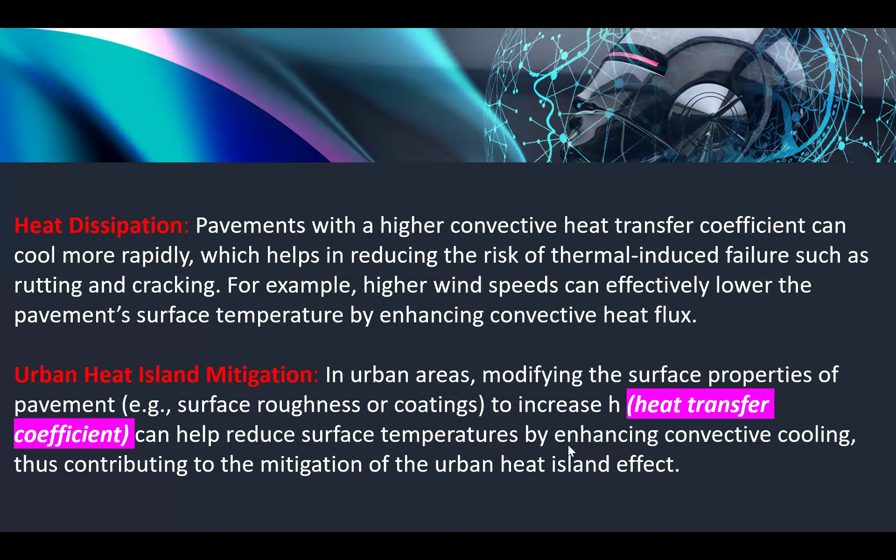So having said all of these things, we need to build a system architecture that encompasses both that aspect and sensor technology, where we have to start looking at temperature sensors, moisture sensors, strain gauges, acoustic sensors, able to give us information about what's happening to the pavement in real time.

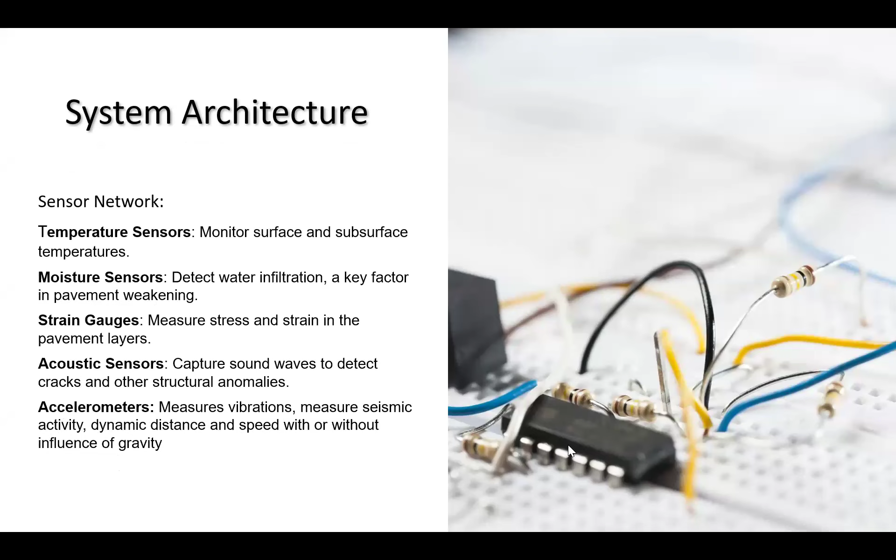So that we're able to now start making models as the goal, we have to build this architecture system in such a way that we have sufficient data collection and transmission, where we're able to run those pavement design models in real time with respect to real climate conditions, solar radiation.

Temperature gradient changes, precipitation effects, wind speed, and moisture ingress. We now need to build an architecture system that can harness, incorporate and integrate all of this in a smart manner to process and give us accurate results, or a confidence level on the performance of our pavement. And of course, you can look at artificial intelligence driven data analysis systems.

Where you look at your predictive analysis, no doubt about the PCIs, the calculation of these effects. Okay, they're very key, but are we able to model them? We now have to start looking at sensor technologies, photographic systems, where we can start taking pictures of our pavements and model those pictures based on the crack propagation of the pavement.

To check the picture of the pavement I took last week or the picture of pavement I took last year. Does it differ from the picture I'm taking now? What has been the changes? Has there been an increase in the cracks or has there been a reduction in the cracks?

So we can start looking at climate resilience and adaptation strategies from a holistic perspective, where how do we look at maintenance strategies? How do we design our maintenance strategies? And what materials are we using for our maintenance operations?

Are we just selecting material because it's the most available material? Yes, I mean, cost-wise, it is ideally useful. But what are we doing in an innovative manner to actually model and prepare our pavements for the unforeseen scenarios with the climate?

I think I went a bit too fast. Okay, no, not too fast.

Okay, so we can start looking at climate adaptation strategies, automated warning alerts, like I did mention, and looking at dynamic traffic management models, where we are not just looking at the environment only, but we are integrating all of this into one system, which is able to give us inclusive, integrated, sustainable, smart mobility systems.

Of course, one of the presenters spoke about route optimization, so they all connect together here. Luckily, we didn't even share presentations, but we're almost speaking the same thing.

So we now have to start looking at our pavement as doctors having a stethoscope. Are we able to listen to our pavement? Are we able to hear what our pavement is saying? Are we able to understand our pavement and cater for effects that will happen to our pavement?

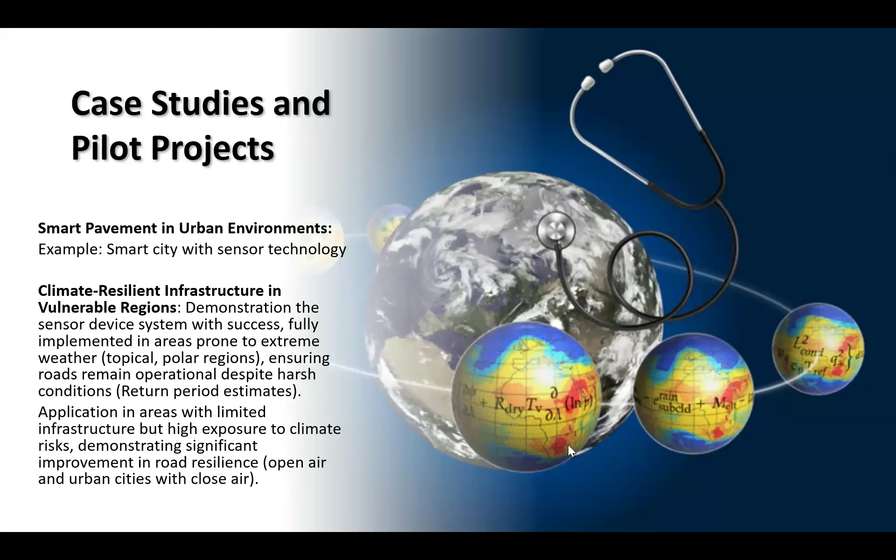Are we able to take antibiotics? Are we able to take antibiotics for our pavement? Are we able to take, shall I say, like your preventive medication for a pavement? Are we able to do that to our pavements? Very, very critical, because the climate is constantly ever changing.

In conclusion, we need to integrate all of this with autonomous systems, which means as much as we're going to be instrumenting our roadways, how does our roadways integrate and connect to electric vehicles? We talk about vehicle-to-vehicle communication, vehicle-to-driver communication, vehicle-to-user communication. What communication protocols are we having? Of course, in real time, to enhance performance of our pavement.

Then we now have to look at scaling, whereby we now start looking at how do we adopt this as a system within our pavement agencies, like your road transport agencies, country-wise.

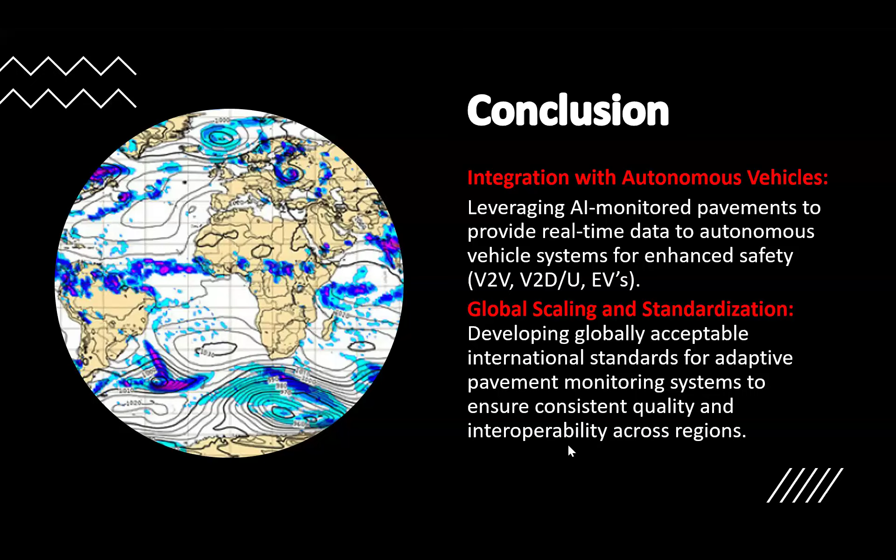I'll stop there and ask one last parting question. Are our current design manuals and guides adapting to climate strategies?

Thank you very much, Sam, for this wonderful presentation and all the thoughts about how to monitor our pavement smartly.